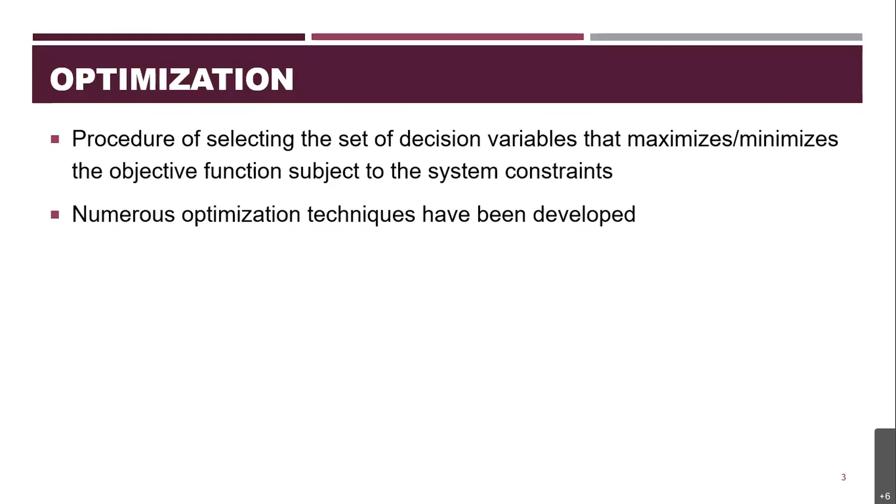Okay, so first let us start with the conventional linear programming technique. I am mentioning all these techniques - linear programming, non-linear programming, goal programming, dynamic programming - as conventional techniques, because these are all very age-old techniques, and there is a major difference between these conventional techniques and the recently evolved evolutionary algorithms.

The major difference between these techniques is that conventional techniques will arrive at the optimal solution based on some iterative procedure. So from one step to the next step, we have to find out the derivatives - it will use the derivatives to find out the optimal solution.

That derivative is nothing but basically finding out the slope, the gradient. So that will take us to the optimal solution. It's a kind of iterative process.

Whereas if you take the evolutionary algorithms or the swarm intelligence techniques, most of those techniques are population-based search techniques. So we have a group of population, and among that group of population, it will search for the best optimal solution. So that is another major difference between the conventional techniques and the evolutionary algorithms.

So if you take this linear programming technique, it can be applied to problems that are linear in terms of objective functions and constraints. So if your objectives are very simple and straightforward, and if it is linear in nature, then we can simply apply the linear programming techniques. It is one of the very widely used optimization techniques, and we have been using it for a long time.

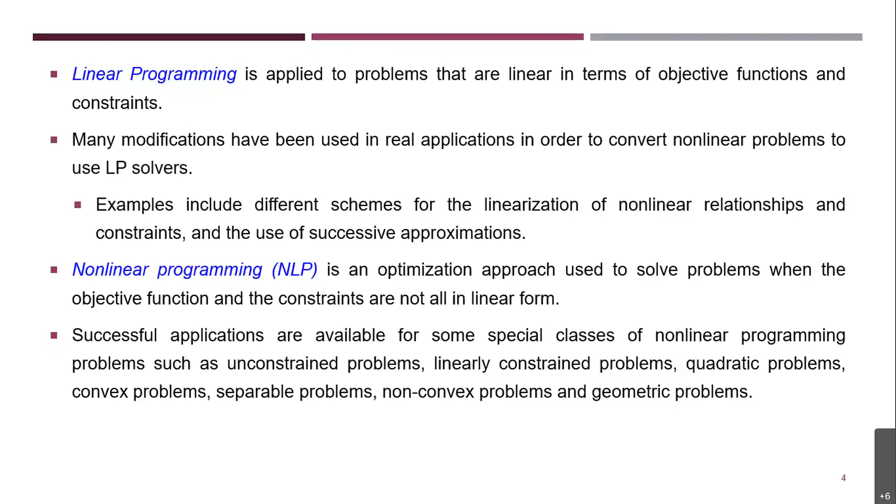So apart from linear and nonlinear programming, there is one more technique in conventional optimization methods, that is dynamic programming. This linear and nonlinear programming have limitations as well. To overcome that limitation, the other conventional technique which was developed is dynamic programming.

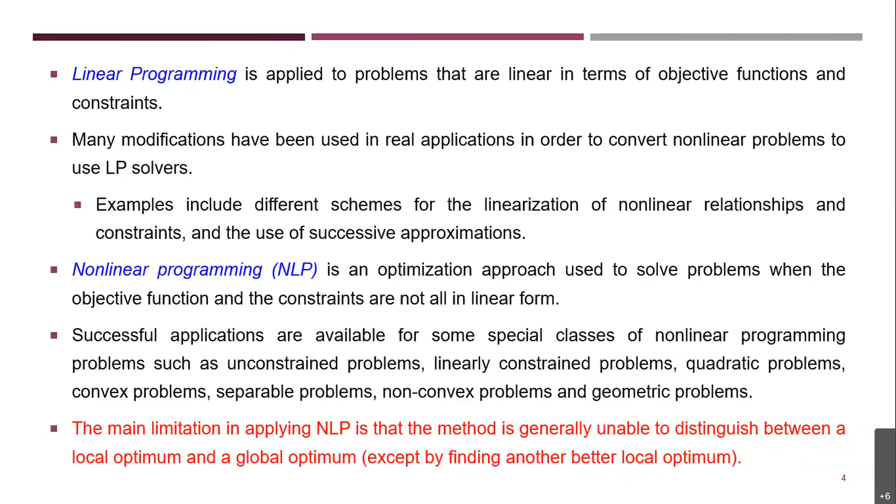The major limitation in nonlinear programming is that the method is generally unable to distinguish between a local optimal solution and a global optimal solution. This dynamic programming was developed by Bellman.

This dynamic programming offers advantages over other optimization tools since the shape of the objective function and the constraints do not affect it, and as such, it has been frequently used in many water resources systems management.

If you look at dynamic programming, we have to discretize the problems into several sets of stages and states. At every stage, a number of possible conditions of the system are identified. And the solution is identified at each individual stage, given that the optimal solution for the next stage is available.

So this dynamic programming will discretize the problem into stages, and again, for each stage, we can have different system states. So it will start a stage by stage process, and finally it will arrive at the optimal solution.

In the recent past, most researchers have been looking at approaches that combine efficiency and an ability to find the global optimal solutions. And one group of techniques known as the evolutionary algorithms seems to have shown the promise of achieving both.

So as I mentioned earlier, even though we have numerous conventional optimization techniques for solving optimization problems, still many people are interested in looking forward to a new technique, and there involves the evolutionary algorithms.

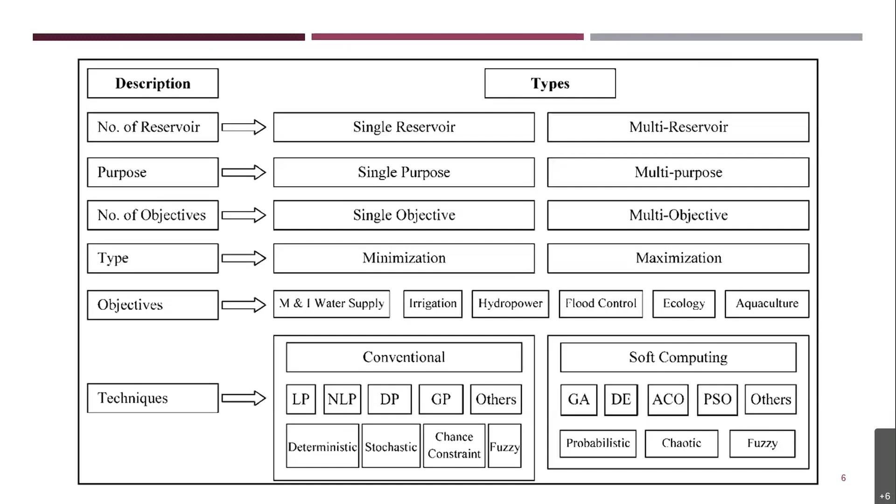So let's see how to formulate the optimization models. I specifically wrote this sentence: model formulation is the most difficult part.

The reason I wrote this sentence is that ultimately we have to express everything in terms of mathematical equations. Those mathematical equations should replicate the real life process. If it is not replicating that real life process, then our mathematical model is not the same as the real life model. We have to actually replicate what is happening in the field.

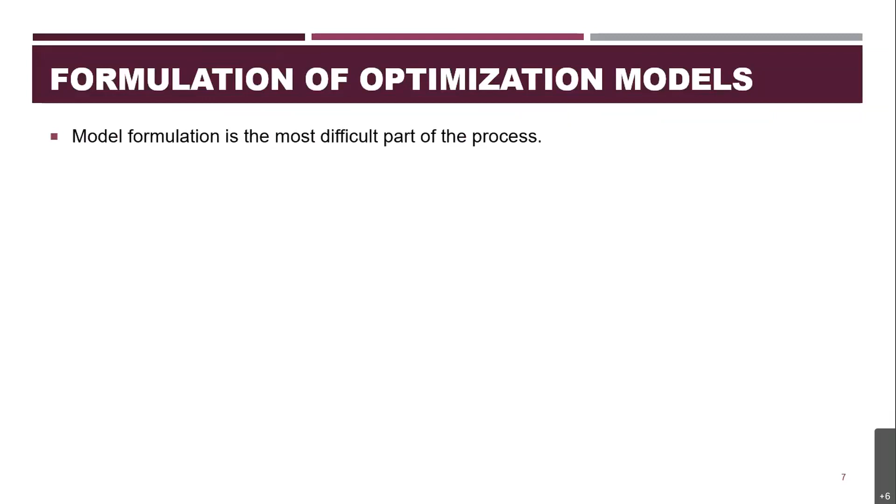So bringing all those concepts and constraints into the form of equations is a really challenging task. We have to be extra careful in developing our mathematical model, that is, in formulating the optimization model.

So how do we formulate that optimization model? Is there any criteria or guidelines? Wagner, in 1975, offered some guidelines for the formulation of mathematical optimization models. These are the guidelines proposed by Wagner in 1975.

The first point is: what are the key decisions to be made, and what problem is being solved. We have to first understand our problem, and what our main decision is here - what we are trying to achieve by solving this problem - that we have to understand first.

And what makes the real decision environment so complex as to require the use of an optimization model? What elements of complexity are incorporated in the model, and what elements are ignored?

Let's take the dam problem, the reservoir problem. If it is an irrigation reservoir, it has a lot of constraints. First we have to determine what the irrigation demand is, how much water we have to supply for the demand. We also have to look at the canal carrying capacity - if the canal carrying capacity is less than the demand, then obviously we cannot supply all the demand.

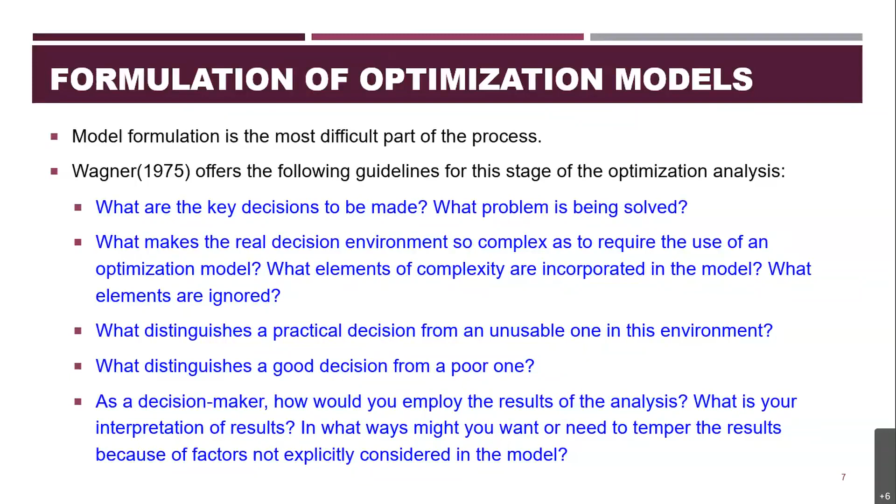And then, the algebraic representation of the optimization model, or the mathematical representation of the optimization model.

In most problems, the aim of the optimization model is to either maximize or minimize some objective function, subject to some constraints. So our model's objective function will be either maximize or minimize some objective function. If our model doesn't have any constraint, then it will be a simple optimization model.

But in reality, even a simple problem will have plenty of constraints. One example is designing a car parking lot. There we have to first look at the dimensions of the plot available, then look at the entrance and exit, the orientation, and the dimensions of the car, and accordingly prepare the parking lots.

Only if you consider all those constraints and bring them into your model will it replicate real results, whatever we obtain from the optimization model can be easily implemented in the field. Otherwise, if we are not considering all those constraints, whatever results we obtain from the optimization model cannot be implemented. Even if implemented, the result will not work.

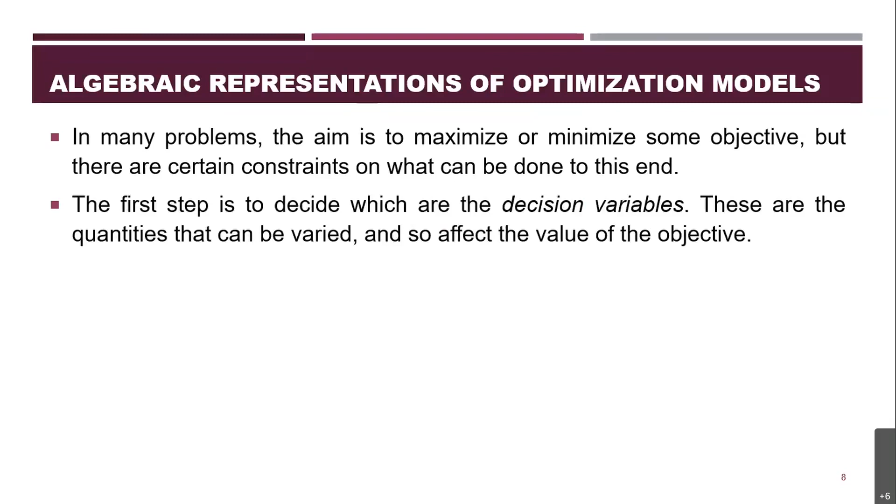So the first step is to decide which are the decision variables. These are the quantities that can be varied and so affect the value of the objective function. The second step in the formulation is to express the objective function in terms of decision variables. We must write down the constraints that restrict the choice of decision variables, and one common sense constraint is that many variables cannot realistically be negative.

This is one of the most important points in optimization models. Even if we develop any mathematical model, finally we will write one constraint known as non-negativity—that is, none of the decision parameters or decision variables are negative; they are always greater than 0.

So first we have to understand the problem, and based on that we develop the objective function. We determine the decision variables, and based on that we develop the objective function, whether maximization or minimization. Then we bring in all the constraints in the form of mathematical functions, and then we put the non-negativity constraint. This framework is a complete representation of any mathematical problem.

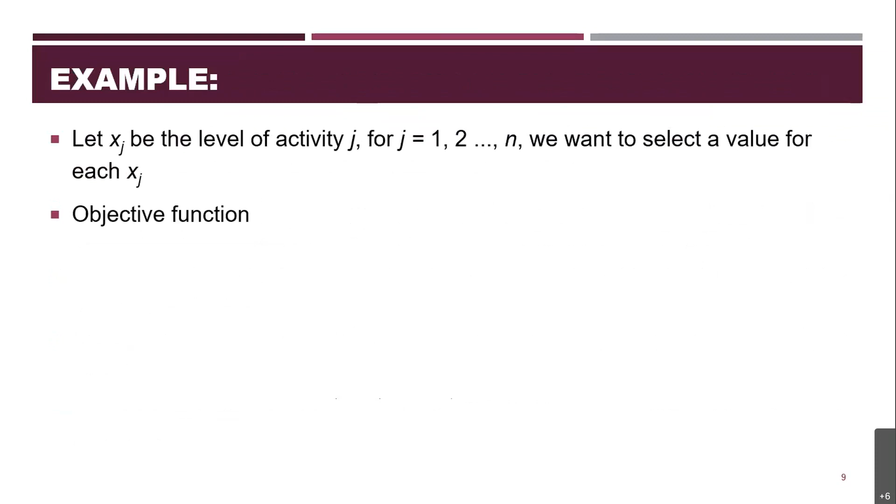Here is a simple example. Let x of j be the level of activity j for j equal to 1 to n. We want to select a value for x of j, so our objective function is c1 into x1 plus c2 into x2 plus dot dot dot cn into xn. Here x1, x2, xn are the decision variables, and c1, c2, cn are the cost functions.

So either we are maximizing or minimizing this objective function, which represents the type of the objective function. Then it is subjected to certain constraints: a1 x1 plus a2 x2 plus dot dot dot an xn less than or equal to a. This type of constraint, the first and the last, is an inequality constraint. The middle one is the equality constraint.

This is a classical optimization problem where you have a specific objective function subjected to various constraints. Once you formulate this objective function, we have to solve it by choosing an appropriate technique. Even before choosing that technique, there are some steps available, which we shall discuss now.

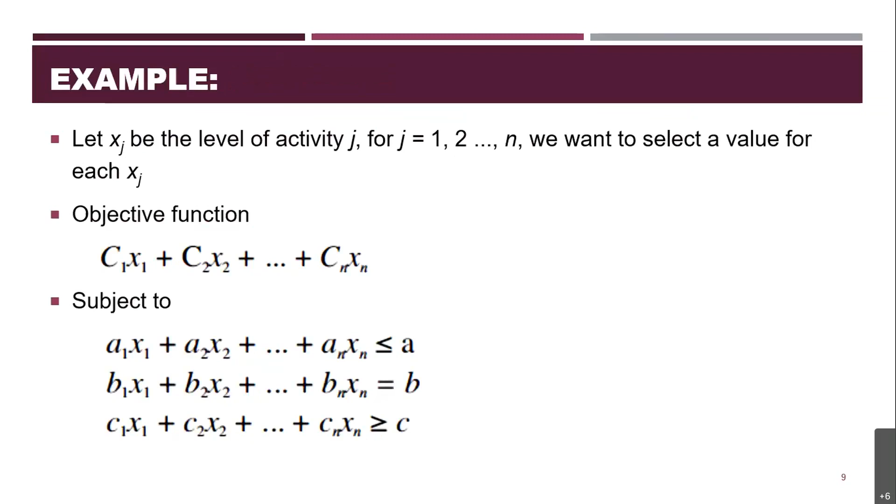So for any optimization model, what are all the possible answers? Sometimes there will not be any feasible solution—no feasible solution. For any problem, especially the optimization problem, we have a solution space. If the solution is not within that solution space after implementing the constraints, then it is an infeasible problem. There may be no values for x of j, our decision variable—we cannot find any appropriate optimal value for the decision variable. In that case, our constraints are not satisfied.

Such problems are called infeasible problems or infeasible solutions. And the second one,

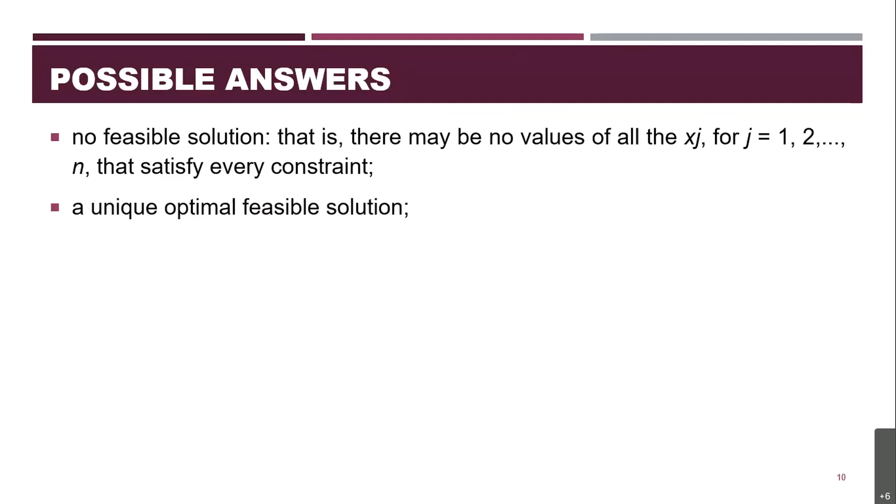sometimes it may have a unique optimal feasible solution. If you have only one single optimal solution, that single optimal solution is also called the global optimal solution. And then we will have a solution space.

In that, whatever solution is there, such solutions will satisfy all the constraints. When your solution satisfies all the constraints, then such a solution is called the feasible solution, because it satisfies all the constraints. But the thing is, it may not be a global optimal solution.

Sometimes it may be a local optimal solution. Locally within that small space, it may be the best solution. It will satisfy all the constraints. But if you look at the entire solution space, it may not be a global optimal solution. So in that case, we will have multiple local optimal solutions, that is, more than one optimal feasible solution.

And then a feasible solution such that the objective function is unbounded. So there is no boundary at one end. It will be infinite. That is, the value of the function can be made as large as desired in a maximization problem, or as small in a minimization problem, by selecting an appropriate feasible solution. So for any optimization problem, we may encounter any one of these answers.

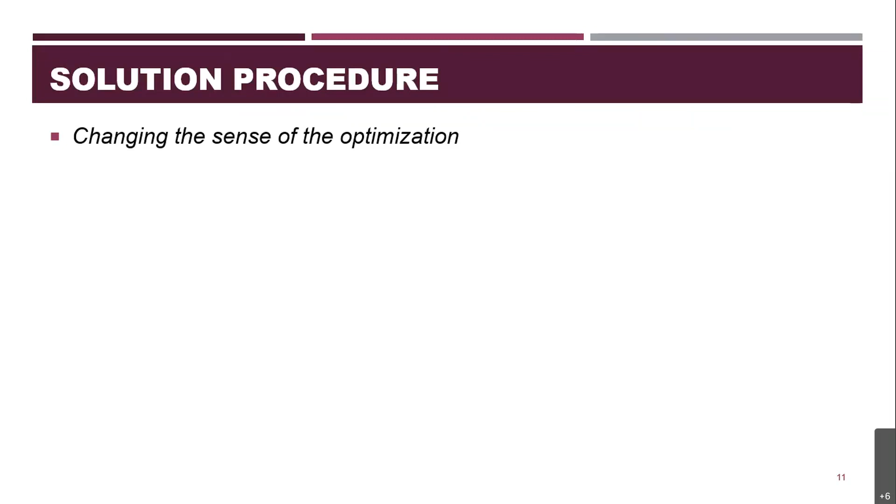First, changing the sense of optimization. That is, sometimes we may need to convert a maximization problem into a minimization problem, or a minimization problem into a maximization problem. This we usually do by multiplying the objective function by -1. By doing so, we are actually changing the nature of the optimization problem, converting a maximization problem into a minimization problem, or vice versa.

And the second one is changing the sense of inequality. We have seen one of the constraints as the inequality constraint, that is, it is not equal - it's either less than or equal to type, or greater than or equal to type. So those inequality constraints can be converted into equality constraints. For that, we have to either add slack or surplus variables. By adding slack or surplus variables, we can convert the nature of the constraints from inequality to equality constraints.

And then in the same way, we can also convert the equality constraints to inequality constraints, by multiplying with some ratios, and finally adding all those ratios to equal 1. Like that, we can convert the equality constraint into an inequality constraint.

So by following these procedures, we can change the type of the problem. For example, if your problem was earlier a maximization type, we can convert that into a minimization type. This process is nothing but a simplification process. Sometimes we cannot solve the problem as such, so in that case we have to modify the problem in a simpler way so that we can easily solve it. For that, we have to adopt all these procedures. Once we do all these things, our problem becomes simpler, then we can choose an appropriate technique and solve our problem.

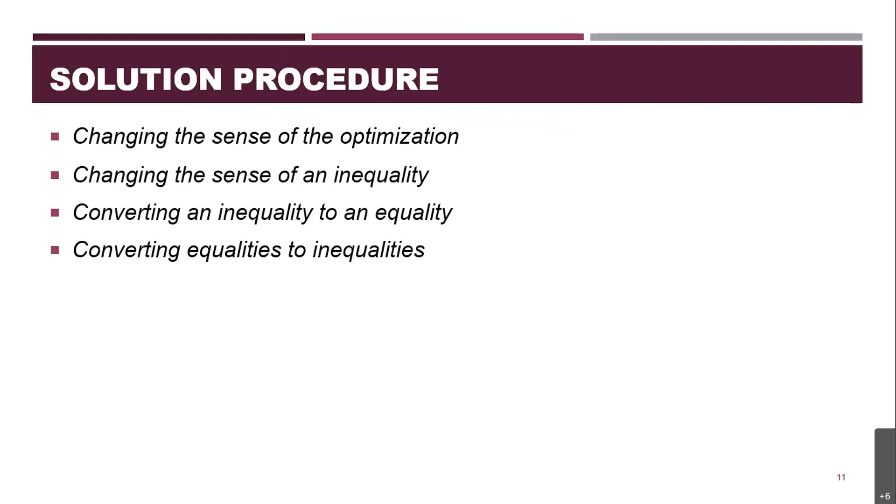So these are the basics in developing an optimization model. First, we have to look at our problem, what our exact problem is, and then develop the optimization model, which has a specific objective function. For developing that objective function, first we have to decide the decision variables - what we are trying to optimize. And then we have to bring in all the constraints. Once we have that optimization problem, we have to look at whether it requires any change or conversion. Once that is done, we have to choose the optimization technique.

As we have discussed earlier, there are many optimization techniques, starting from simple linear programming to recently developed evolutionary algorithms. In this lecture, I will be briefly discussing nonlinear programming. In fact, there are plenty of methods in nonlinear programming - for simple unimodal problems, there are separate techniques for unconstrained problems, and separate techniques for constrained problems. Here in this lecture, I will be restricting myself to only a few techniques.

So, nonlinear programming for one-dimensional minimization methods, or one-dimensional unimodal mathematical problems - for that we have two methods. One is the elimination method. Under the elimination method, we have unrestricted search, exhaustive search, dichotomous search, interval halving method, Fibonacci method, golden section method, and then the second method is the interpolation method.

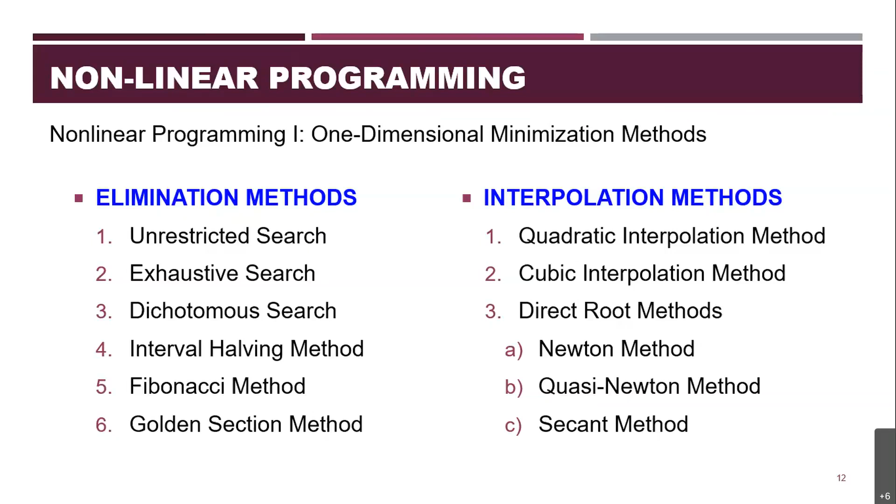There we have quadratic interpolation method, cubic interpolation method, direct root method, and under direct root method we have Newton method, quasi-Newton method, and finally secant method.

And the nonlinear programming for constrained and unconstrained problems. For unconstrained optimization techniques, we have direct search methods and indirect search methods. Under direct search methods, we have random search method, grid search method, univariate method, pattern direction method, simplex method, and in indirect method, steepest descent method, conjugate gradient method, Newton's method.

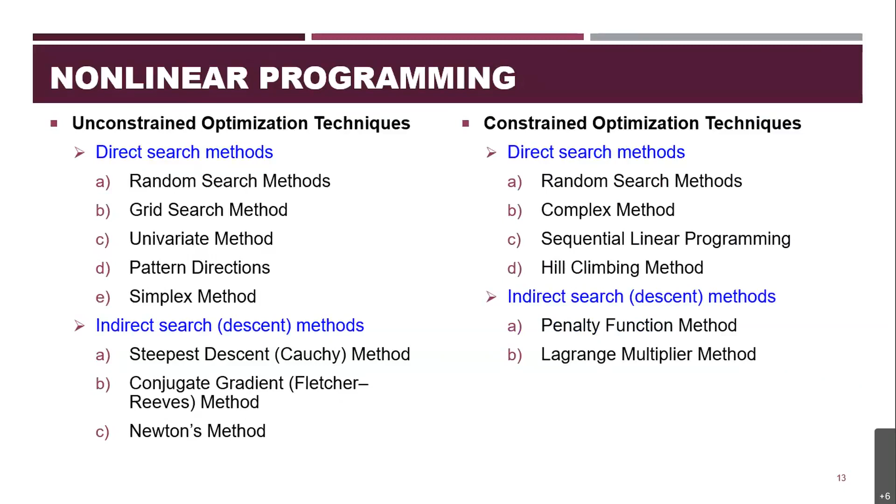Nonlinear programming for constrained optimization includes again direct methods and indirect methods. In direct method, we have random search methods, complex method, sequential linear programming method, hill climbing method, and in indirect method, we have penalty function method and the Lagrange multiplier method. So here let us see how to solve a nonlinear optimization model and its solution procedure.

Since we are discussing the nonlinear technique, as I told, this nonlinear technique will arrive at the optimal solution based on some iterative procedure. That is, from one step to the next step, it progresses through iterations. It may find the derivatives, the gradient, or the slope. So by doing that iteration, we are trying to arrive at the optimal solution.

Whereas these evolutionary algorithms usually search for the optimal solution from a solution space, that is, from a population of solutions. Since these conventional methods are based on an iterative procedure, we have to basically find out the derivatives in each and every step.

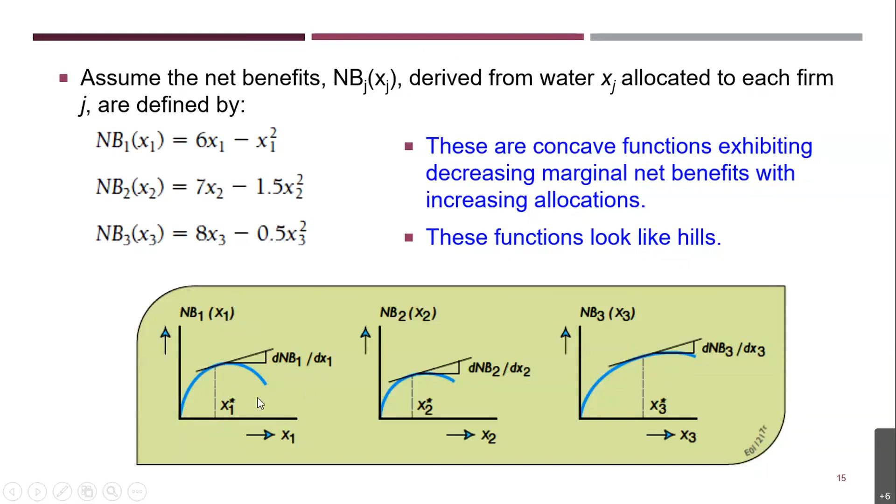If you take the first firm, take the derivative with respect to x1, that is 6 minus 2x1. If you equate that to 0, you can find x1 equals 3. So when x1 is equal to 3, we can obtain maximum benefit from firm 1. That's the solution based on the calculus approach. The derivative dNB(x1)/dx1 of the net benefit function for firm 1 is 6 minus 2x1, and hence the best allocation to firm 1 would be 3.

Similarly, we can obtain the best optimal solutions for firm 2 and firm 3, and those two answers are 2.33 and 8 respectively. So the total amount of water desired by all firms is the sum of each individual firm's allocation, and that works out to be 13.33 — that is 3 plus 2.33 plus 8.

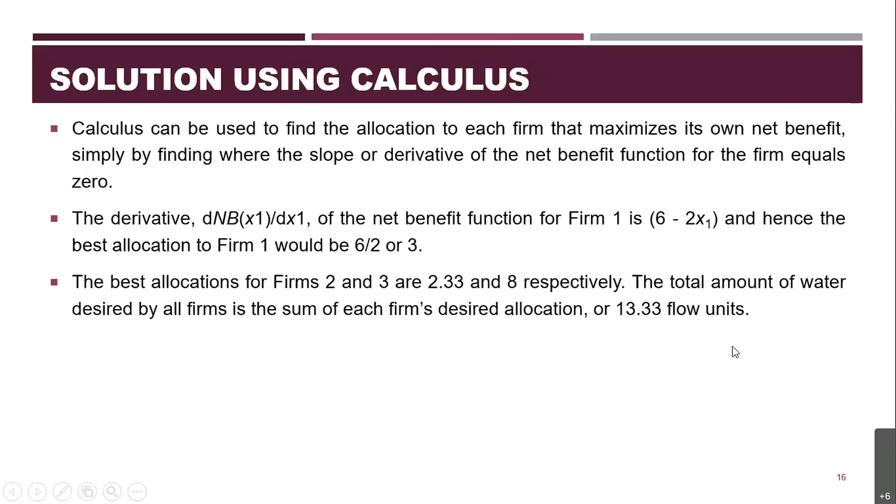So here we have not considered the total quantity of discharge. In our previous problem, it was mentioned that the total amount of water available is limited to a quantity Q. So far we have not considered the quantity Q, that is, we have not taken that constraint into our problem.

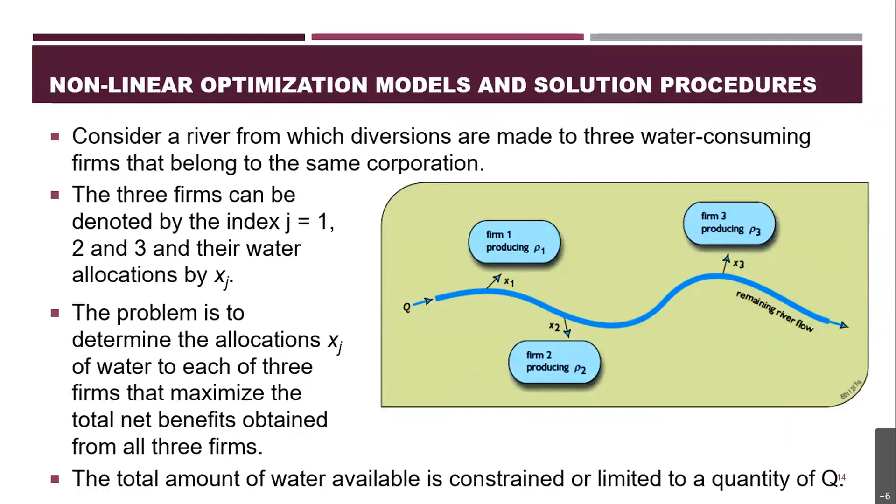If there are no constraints associated, follow the calculus approach for the solution. But if you put the constraint that Q is only 6, the total quantity of water available is only 6 units, then we cannot allocate the earlier quantities to these individual firms, because that would require a total of 13.33 flow units. Here we have a lesser quantity of water available, so we have to go for a different approach. However, only 6 units of flow are available for all 3 firms, so this constraint renders the previous solution infeasible.

So in this case, we want to find the allocations that maximize the total net benefit obtained from all firms, subject to having only 6 flow units to allocate. In this case, the simple calculus method will not be a suitable technique, so we have to look for a different technique.

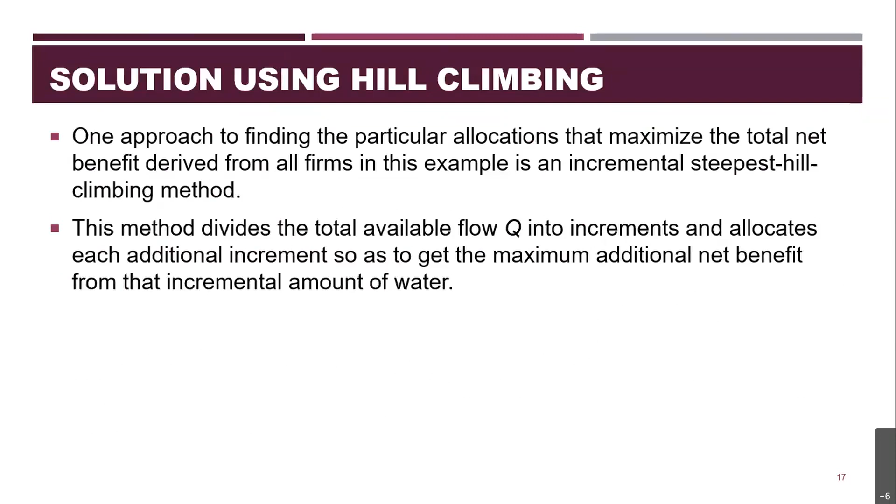Let us work out this using a method known as the hill climbing method. One approach to find the particular allocation that maximizes the total net benefit derived from all the firms in this example is an incremental steepest hill climbing method. This method divides the total available flow Q into increments and allocates each additional increment so as to get the maximum additional net benefit from that incremental amount of water. This procedure works in this example because the functions are concave, that is, the marginal net benefit decreases with increase in allocation.

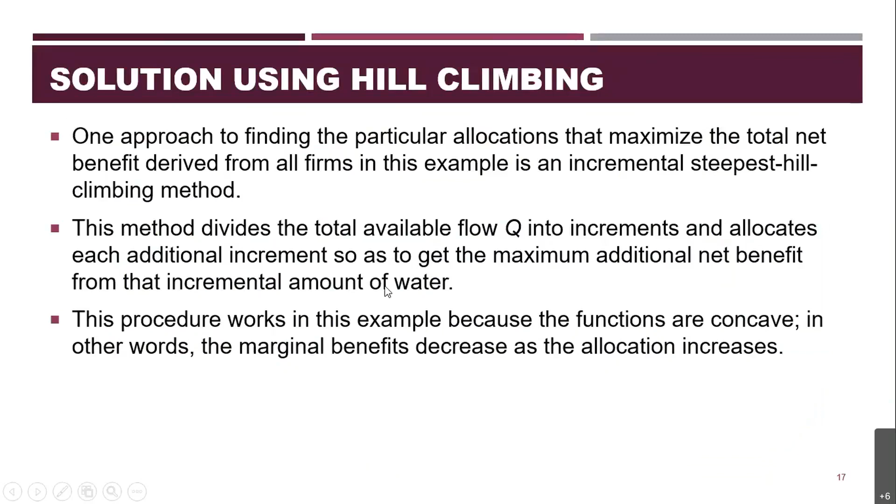Okay, let's look at an example of the same problem. We have a river flow, and from that river we have to allocate water to three different firms. These are the objective functions for the three firms: 6x1 minus x1 square, for the second firm 7x2 minus 1.5 x2 square, and for the third firm 8x3 minus 0.5 x3 square.

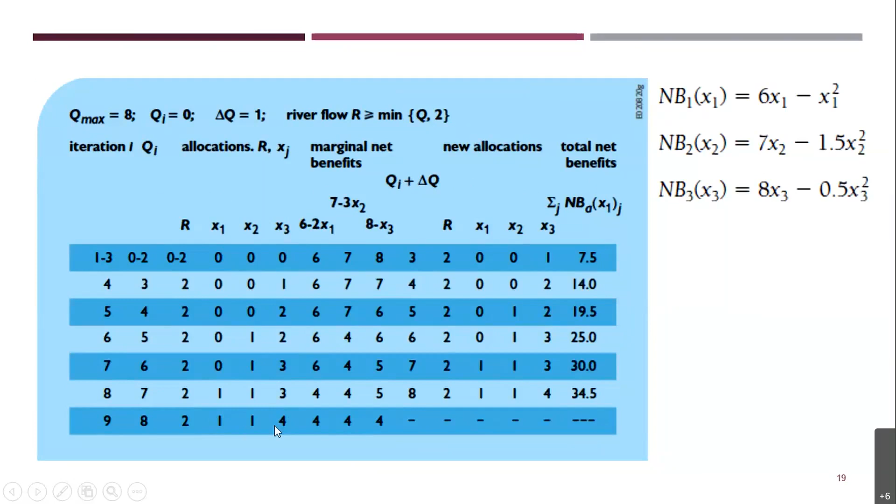The allocation for x1 is 1 unit, x2 is 1 unit, and x3 is 4 units. Whereas when the delta Q is very fine, then the entire allocation changes. X1 is 3 units, x2 is 2.33 units, and x3 is 8 units.

And the total net benefit here works out to be 49.2 units, whereas in the previous problem it's almost 34.5 only. So with the increase, with the size of the increment, or sometimes it's based on the discretization...

If that is fine, if it is very finer, then we will get more finer optimal solutions. But however, that may increase the computational time, or sometimes it may also result in some other issues like curse of dimensionality in terms of dynamic programming.

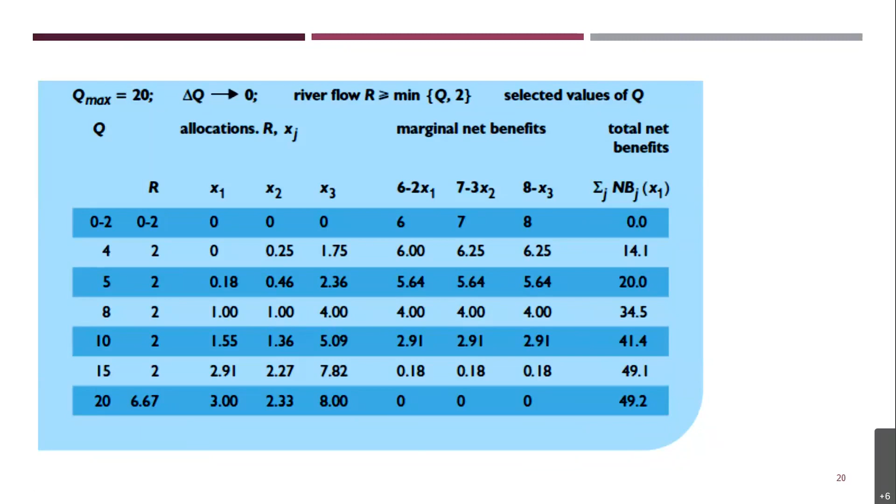So it's a final allocation for each firm with respect to the Q.

So this hill climbing approach leads to optimal allocations only if all the net benefits, when summed, are being maximized or concave. Only when the objective function is of concave type can we use that hill climbing approach. That is, the marginal benefit decreases with the increase in allocation, which is a concave type problem. Otherwise, only a local optimal solution can be guaranteed. That's another limitation of this hill climbing method.

That's the same for even calculus-based optimization algorithms.

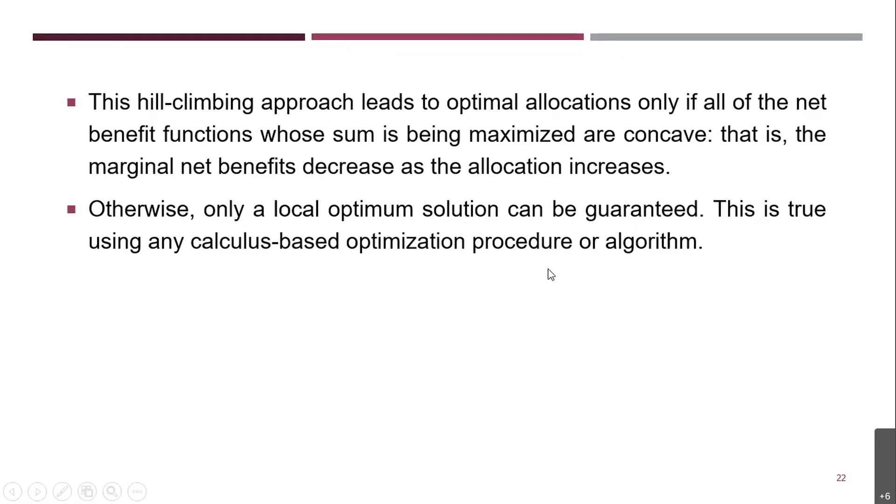So another method which is widely used for non-linear type optimization problems is the branch and bound method. Actually, this branch and bound method is mostly used for mixed integer linear programming problems. Because of its simplicity, it is also used for solving most non-linear optimization models. This branch and bound method is very effective in solving mixed integer linear and non-linear programming problems.

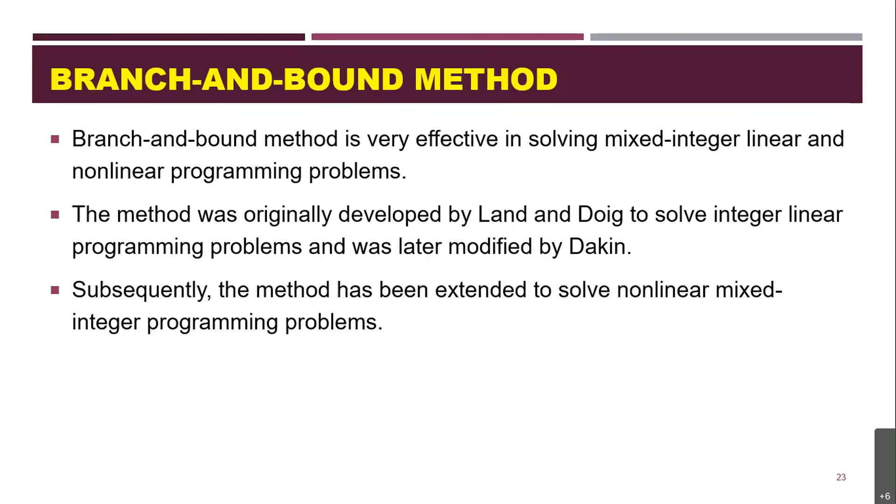The method was originally developed by Land and Doig to solve integer linear programming problems and was later modified by Dakin. Subsequently, the method has been extended to solve nonlinear mixed integer programming problems. So let us consider the following formulation.

Let our objective function be minimization type, that is minimize f of x, which is a nonlinear function, subject to g of j of x greater than or equal to 0, where j equals 1 up to m, and h of k of x equal to 0. This is the equality type constraint, the first one is the inequality type constraint, and the third is x of j is an integer.

The branch and bound method was mostly first implemented for solving mixed integer linear programming, where the decision variables being integers is one of the constraints. Here x is a decision vector that contains the decision variables.

If you consider only the first two constraints, the equality and inequality constraints, then the design vector x is called a continuous feasible solution if it satisfies those two. If the design vector x satisfies all three constraints, including x being an integer, then it is called an integer feasible solution.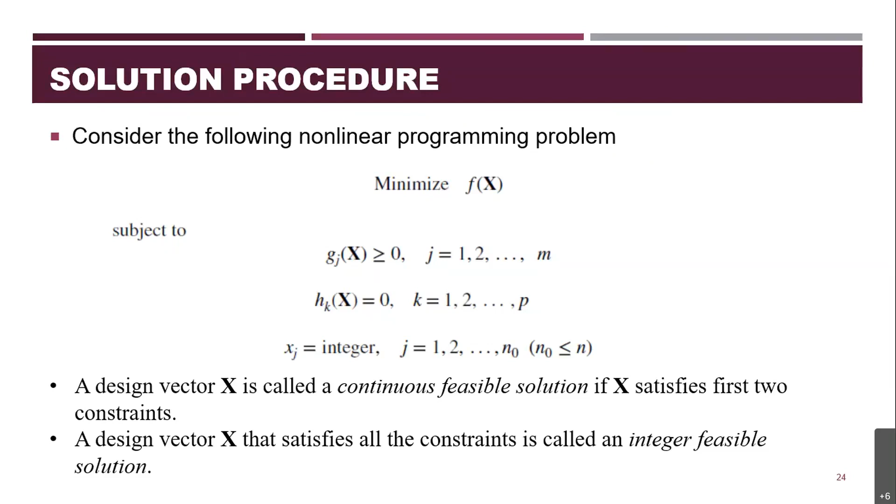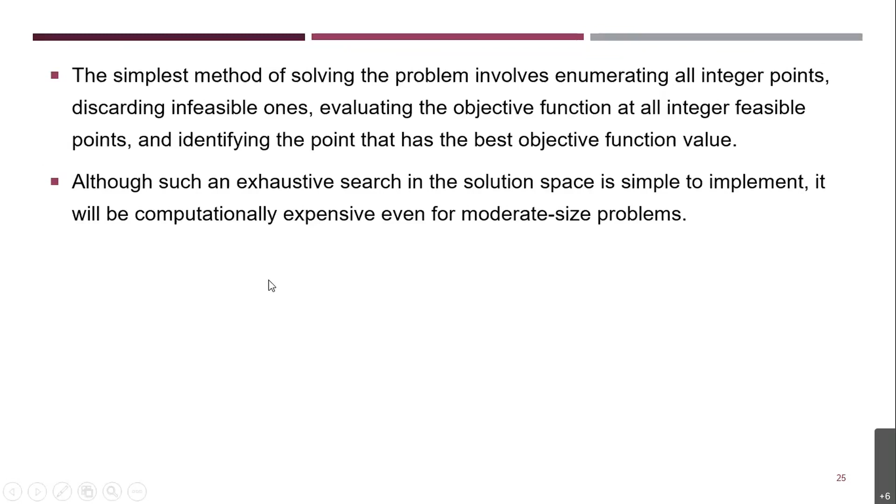The simplest method of solving the problem involves enumerating all the integer points, discarding the infeasible ones, evaluating the objective function at all integer feasible points, and identifying the points with the best objective function value. Although such an exhaustive search is simple to implement, it becomes computationally expensive even for moderate size problems. The branch and bound method can be considered a refined enumeration method in which most non-promising integer points are discarded without testing them.

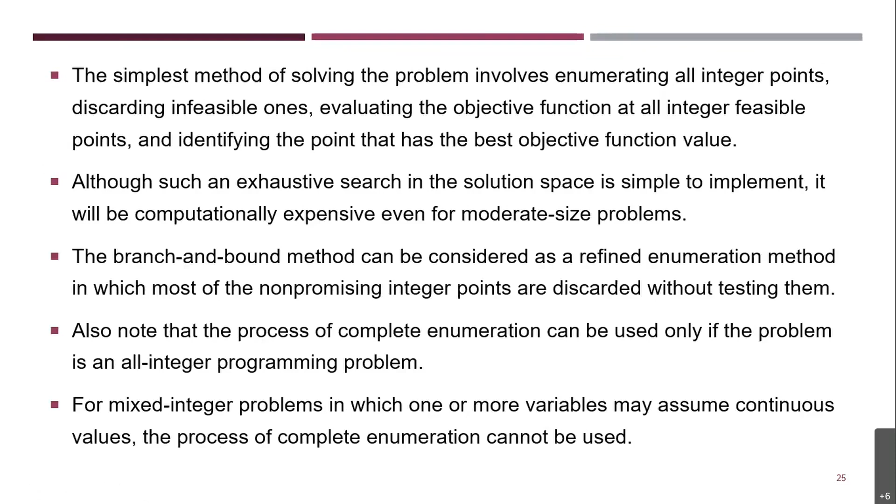Also, the process of complete enumeration can be used only if the problem is an all-integer programming problem. For mixed integer problems in which one or more variables may assume continuous values, complete enumeration cannot be used. So mostly the complete enumeration method is used only when all the variables are integers.

In the branch and bound method, the integer problem is not directly solved. The method first solves a continuous problem obtained by relaxing the integer restriction on the variables. This is the first step: without considering the constraint that all decision variables are integers, the problem is solved using any linear programming technique.

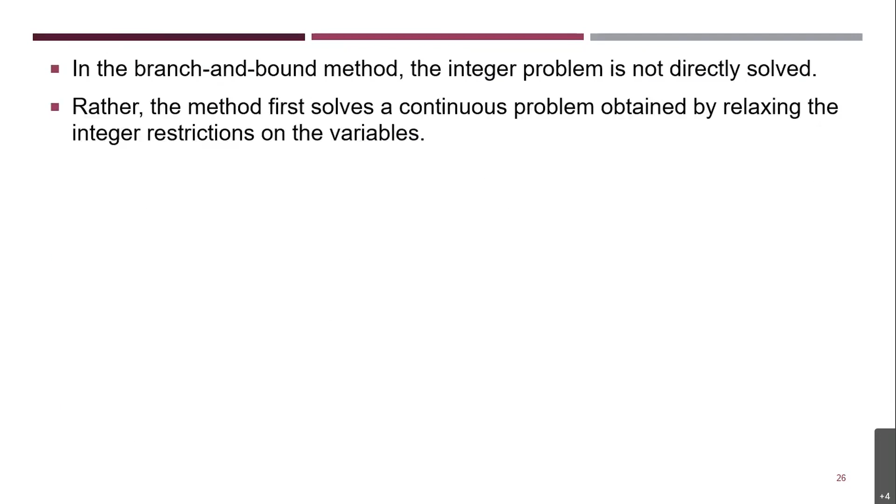If the solution of the continuous problem happens to be an integer solution, it represents the optimum solution of the integer problem. Otherwise, at least one of the integer variables, say x of I, must assume a non-integral value. If x of I is not an integer, we can always find an integer x of I such that it lies between these limits.

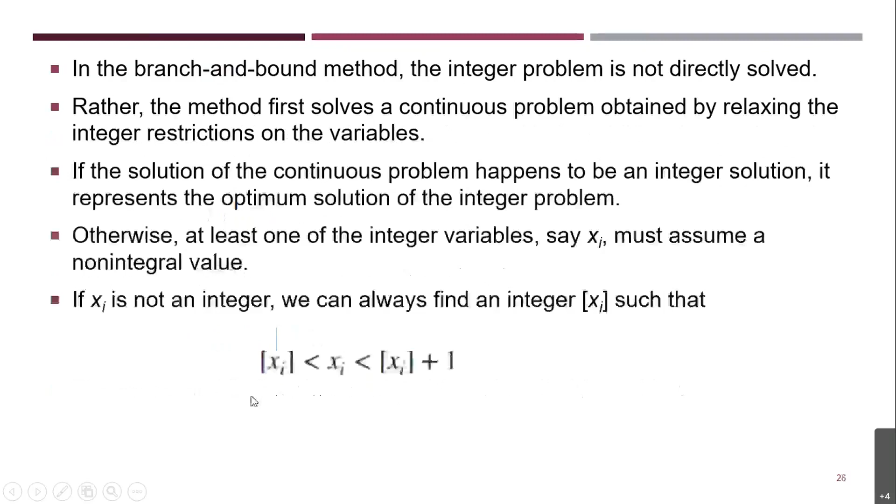Once we formulate this condition, we can categorize this into two subproblems: one with the additional upper bound constraint, and the other with the lower bound constraint. The process of finding these subproblems is called branching. Basically, in the branch and bound problem, we divide the problem into two types, and this process of separating the problems is called branching.

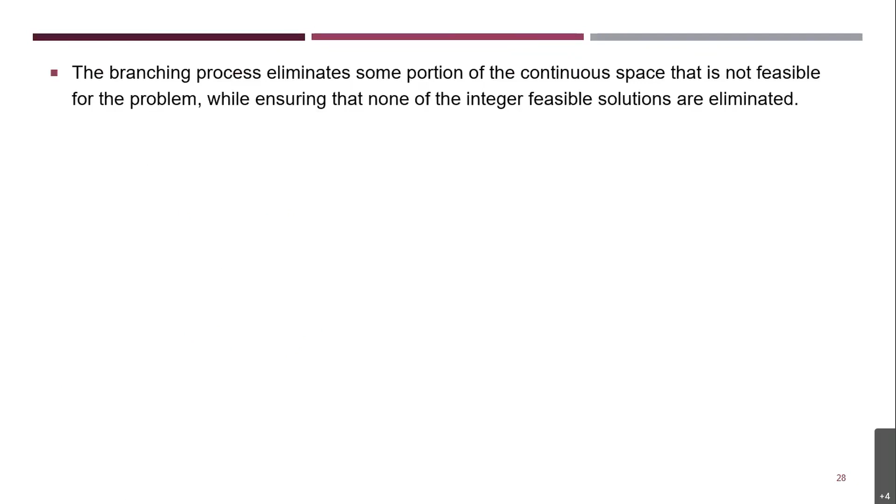The branching process eliminates some portions of the continuous space that are not feasible for the problem, while ensuring that none of the integer feasible solutions are eliminated. Each of these two subproblems is solved again as a continuous problem. The solution of a continuous problem forms a node, and from each node, two branches may originate.

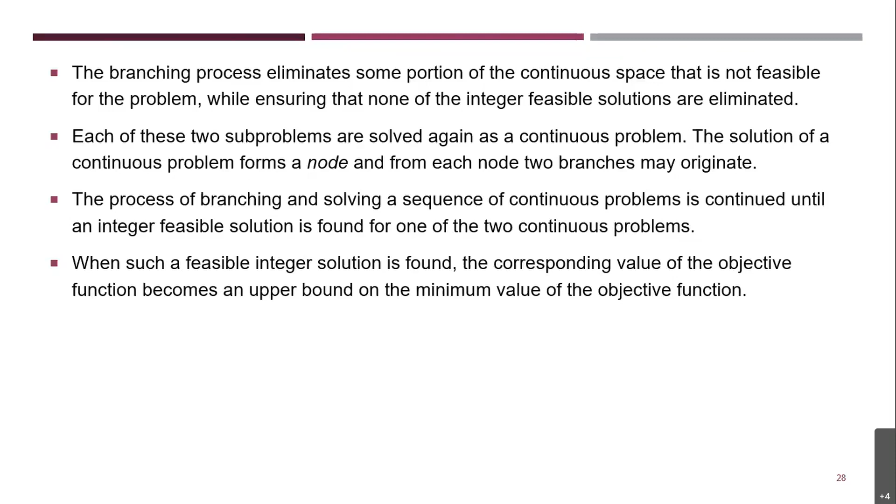The process of branching and solving a sequence of continuous problems continues until an integer feasible solution is found for one of the two continuous problems. When such a feasible integer solution is found, the corresponding value of the objective function becomes an upper bound on the minimum value of the objective function. At this stage, you can eliminate from further consideration all continuous solutions whose objective function values are larger than the upper bound. The value of the upper bound is updated whenever a better bound is obtained.

If the number of decision variables is quite less, easily we can solve any optimization problem manually. If it is only 2-dimensional, we can use the graphical approach or solve it manually. But most real life and real world problems have n number of objective functions and a number of constraints. In that case, if you formulate the canonical form of the optimization problem, the matrix becomes very big, and we cannot solve it manually.

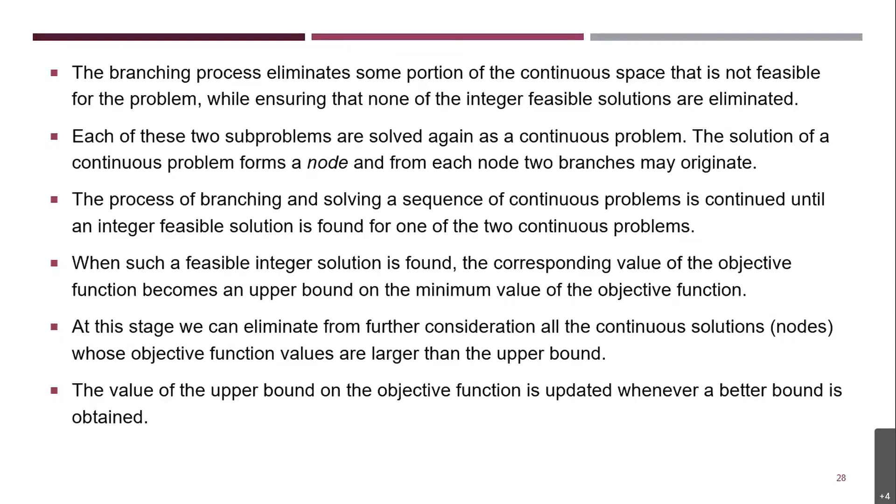So in that case, we look at various tools that may aid us in solving the optimization problem. Such tools are available for solving optimization problems, and I have used one such type of tool to solve a real world problem.

So that's what this case study is about. In this case study, I'm going to discuss the optimization of the Koyna hydroelectric project.

This hydropower production is a nonlinear problem. We solved it by first formulating the optimization problem mathematically, and then solving that mathematical formulation using a software called Lingo. It has various solvers available, and we used the global solver, which is capable of solving nonlinear problems.

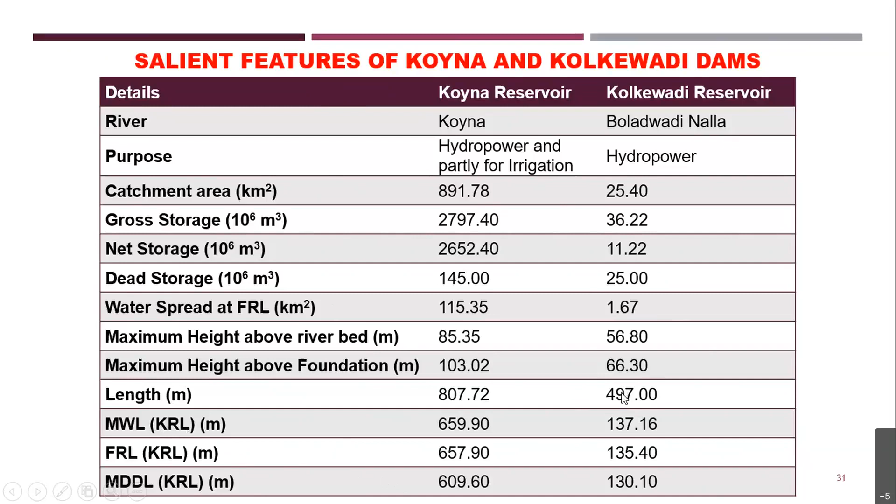So here maximum water level, full reservoir level, minimum drawdown level, and various other features are given. These are the details of the powerhouses.

Stage 1 and stage 2 are housed in a single unit or plant, so we have taken it as a single unit, PH1. It has 4 turbines in both stage 1 and stage 2, with a total capacity of 4 turbines of 70 megawatts in stage 1, and

4 turbines of 80 megawatts in stage 2. Stage 3, which comes under Kolkewadi Dam, we have named PH2, with 4 turbines of 80 megawatts. Stage 4 is the biggest power plant in the system, having 4 turbines of 250 megawatts.

And all these PH1, PH2, PH3 power plants are on the western side of the reservoir, whereas the Koyna Dam powerhouse is on the dam foot. Actually, the water flows to the eastern side from this way.

Since the major power plants are located on the western side of the reservoir, that has resulted in conflict in using the available water. If you want to generate more hydropower, a major share of the water needs to be diverted to the western side. In fact, that resulted in disputes among various states that share the Krishna water. According to the Krishna Water Dispute Tribunal, that has limited the diversion of water towards the western side for power production.

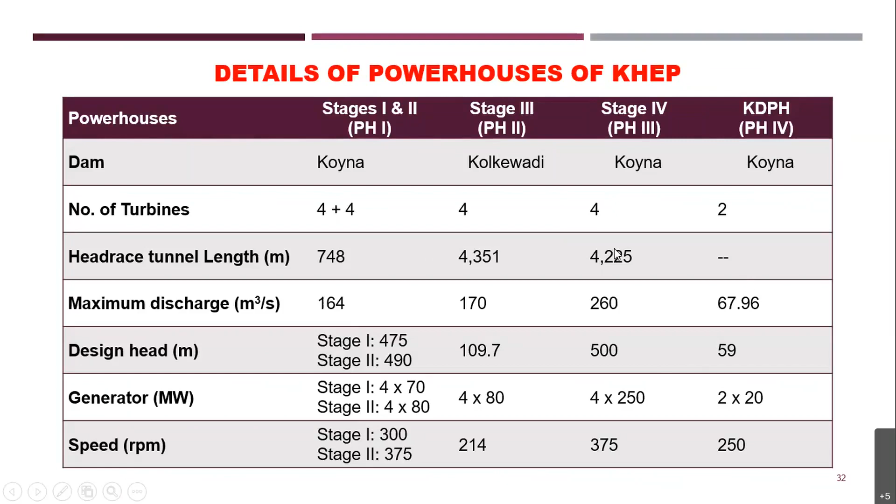The complexities are that hydropower releases are termed as non-consumptive, since the water is used for some other purpose after power generation, mostly for irrigation. However, in the case of Koyna hydroelectric projects, the releases to major powerhouses and irrigation are in opposite directions, which makes the operation of the system very complex.

Diverting a large volume of water to major powerhouses on the western side of the reservoir resulted in disputes among different stakeholders. The Krishna Water Dispute Tribunal limited the diversion of large quantities of water towards the western side for power production, and there also exist conflicts among all the powerhouses, since they are at different levels and have different capacities of power generation. So considering all these complexities that exist in the field, we have to develop a suitable optimization model for maximizing the hydropower production from the system.

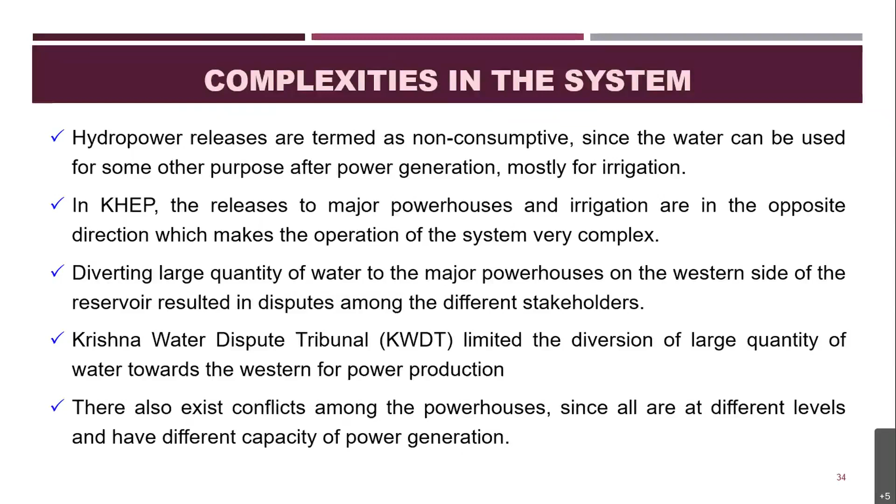So we developed a model. Before developing an optimization model, we studied the existing operation of the hydropower plant by developing a simulation model. Actually, this Koyna hydroelectric project is a peak power plant, that is, it is operated only for producing peak power demand.

In power production there are 2 categories: one is base load and the other is peak load. Mostly these hydropower plants are operated producing peak loads, because we can easily increase or decrease power production in hydropower generation compared to other modes of power generation.

So again, this Koyna system is also a peak load system, operated only for a few hours of duration in a day. So we tried to study the existing operation policies of the system using a simulation model, and we simulated the operations for different durations, that is for 4-hour, 6-hour, and 8-hour durations.

We also considered 2 scenarios based on the Krishna Water Dispute Tribunal constraints, that is a limitation on the water. According to the Krishna Water Dispute Tribunal, we cannot divert huge quantities of water for power production towards the western side, so we considered that constraint in two cases: one strictly following that condition, and the other without following that constraint.

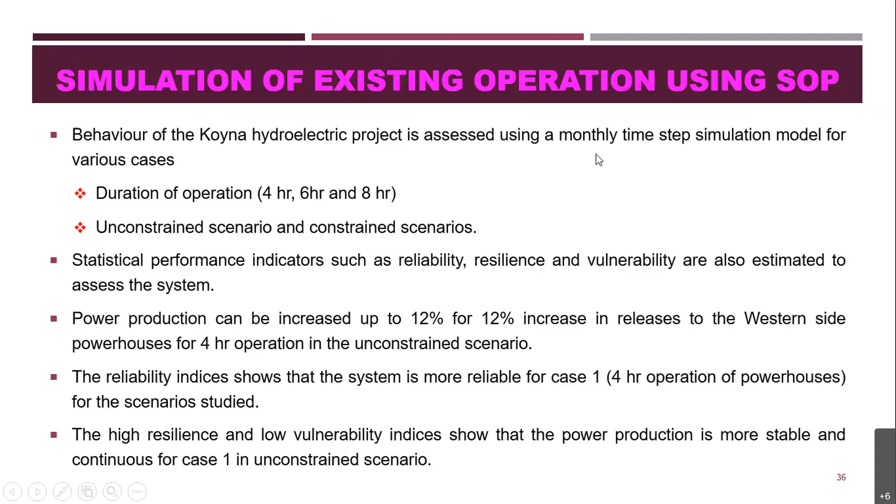So with this background, we developed the optimization model. The objective function of the optimization model is maximizing the hydropower production from all 4 powerhouses.

So that is given here: Maximize Z equal to summation of T equal to 1 to 12 and N equal to 1 to 4 of PH N comma T. PH is nothing but the power production, N represents the number of hydropower plants, grouped into 4 plants PH1, PH2, PH3, PH4, and T represents the time period. It's a monthly model, so T represents month, time period 1 to 12.

So PH of N, T is the power produced from the powerhouse N during the time period T in kilowatt hour. According to Loucks et al. 1981, power production during any time period T depends on the installed plant capacity, flow through the turbines, and the average effective storage head, number of hours of operation, and a constant for converting the product of flow, head, and plant efficiency to electrical energy.

Accordingly, the power production function is given as: PH equals K R H eta, where K is the constant used to convert the hydropower into kilowatt hour, R is the release to the powerhouse, H is the net head, and eta is the plant efficiency.

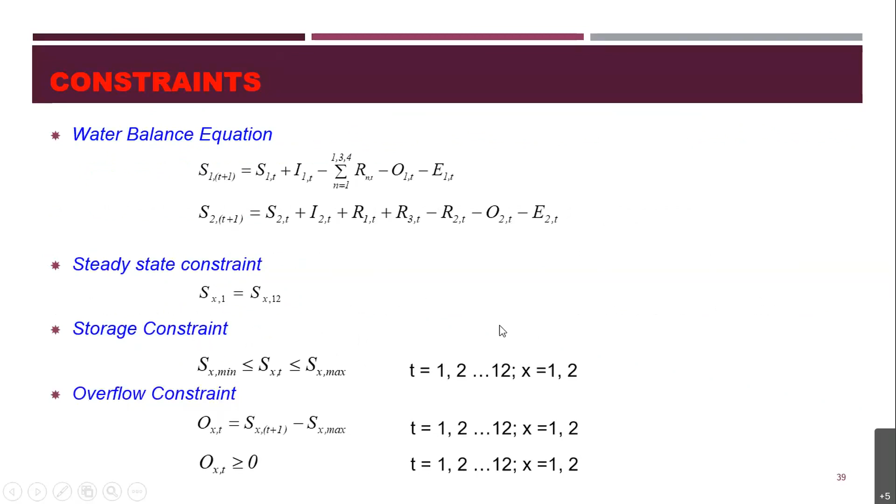Once the optimization model, this mathematical model, is formulated with the objective function and considering all the field constraints, we then have to solve the optimization model. In solving that model, we analyzed 4 policies, 4 scenarios.

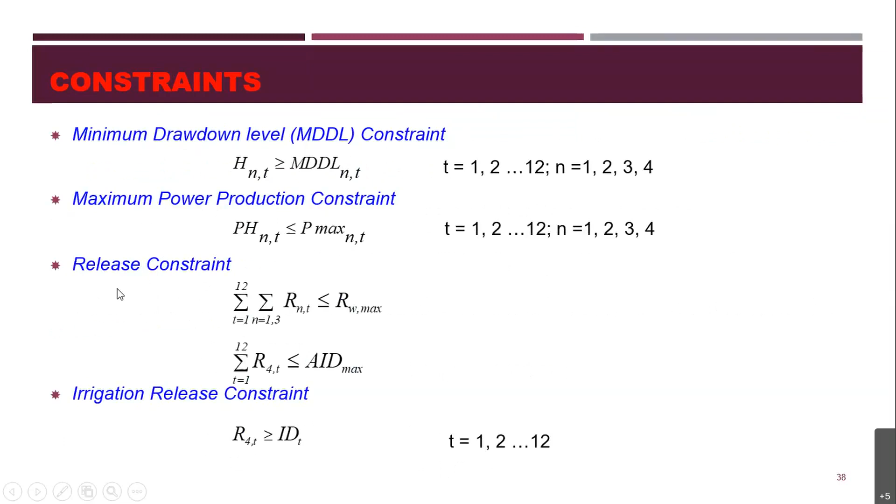The first scenario has no binding constraint on the western and eastern side releases. We have not considered any release constraint on the power plant. This is just to know the potential available for power production - what is the optimal hydropower production that can be obtained without any binding constraint on releases, both on the western side as well as on the eastern side.

The second policy considers only the annual binding constraint on irrigation, ensuring that at least the total annual irrigation demand is satisfied every year. That is the second policy.

When doing this, we found that though the annual irrigation demands are satisfied every year, if you look month-wise, the demands are not satisfied properly - in some months the releases were less than the demand, and in some months more than the demand. Hence, to ensure that both the annual as well as the monthly demands are satisfied for irrigation, we developed policy 3, where both the monthly and annual binding constraints on irrigation are considered.

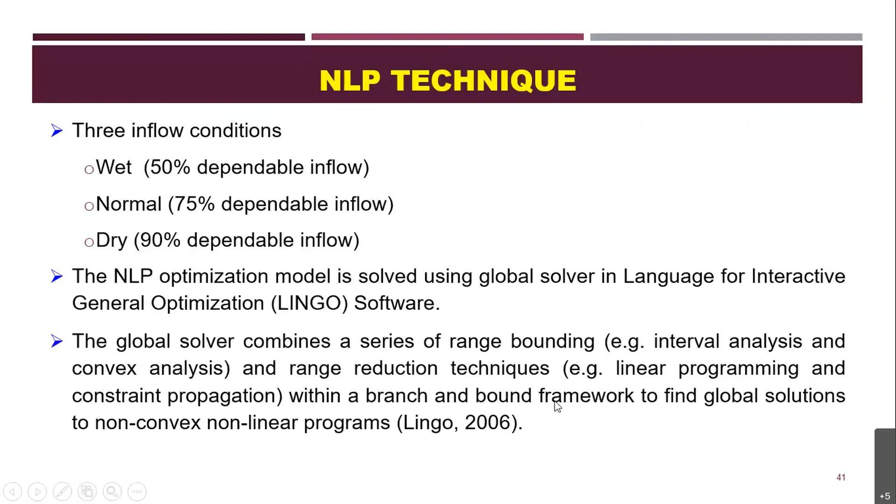So these are the results obtained from the model for maximum annual power production. There are 4 policies. Policy 1 has no constraints on releases for power production or irrigation. Policy 2 shows the constraint on annual irrigation releases, so that demands are satisfied annually as per requirement. Policy 3 has both annual and monthly irrigation constraints. Policy 4 is strictly based on the Krishna Water Dispute Tribunal.

When no binding constraints are considered, the model obviously results in higher hydropower generation. Also, when the Krishna Water Dispute Tribunal constraints on diverting water are strictly enforced, the wet and normal scenarios result in almost the same hydropower generation, and the difference among the 3 inflow scenarios is quite small, meaning inflow doesn't have much effect here. On the other hand, without that constraint, power production varies significantly with changes in inflow scenarios.

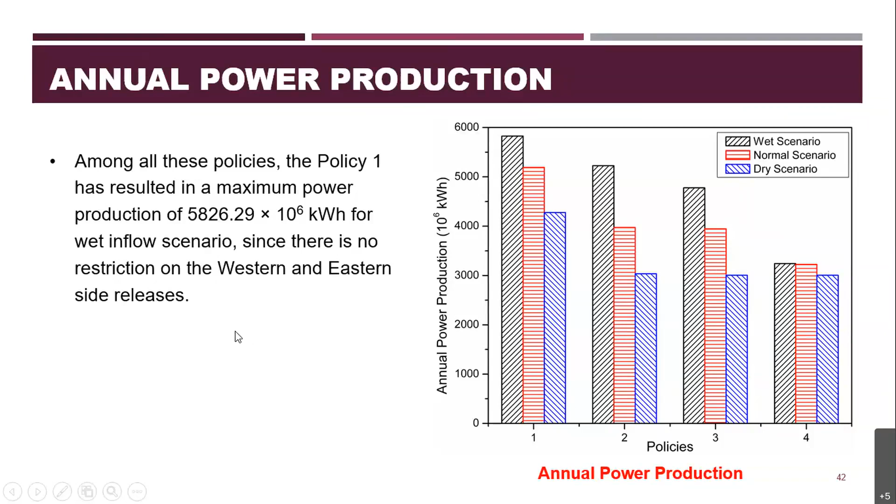Among these policies, policy 1 has resulted in a maximum power production of 5826.29 million kilowatt hours for the wet inflow scenario, since there is no restriction on the western and eastern side releases. These are the production values for each definition, for the wet inflow scenario.

That's the biggest power plant in this system. Powerhouse 4, through which irrigation releases are made, has very few releases in the model, and in fact no releases in most months, because it's a power plant with small power production capacity. Since it's a maximization problem, without enforcing such a constraint the model ensures only maximum production and has not given any significant irrigation.

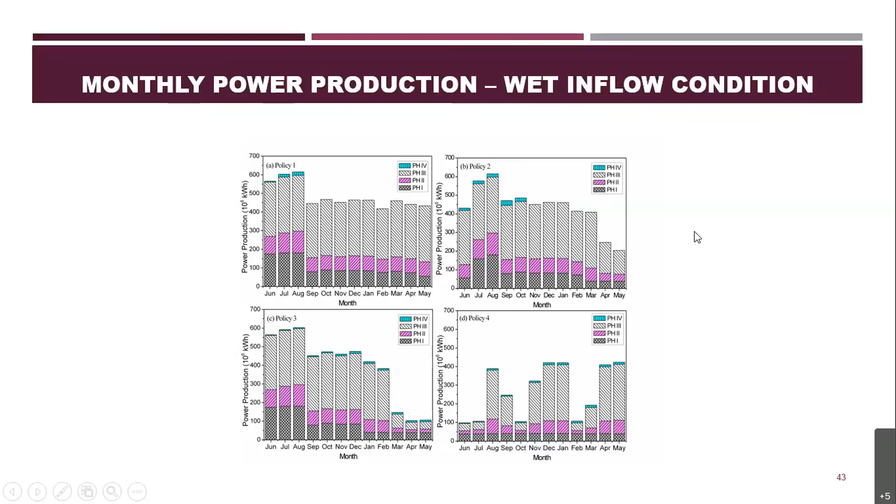Policy 4 strictly enforces the Krishna Water Dispute constraint, where we consider the binding constraints on releases towards both the western and eastern sides. All these figures are for the wet inflow condition; the same analysis applies for normal and dry inflow conditions, showing releases to different power plants in the system for different policies and inflow scenarios.

So we have the optimal solution here. After obtaining the optimal solution, we have to check whether that optimal solution is sustainable for a longer time period. To check that, we simulated that optimal solution, simulated the operations of this Koyna hydroelectric project, and then studied the performance of the system. Upon doing that, we identified that the system has satisfactorily performed well for a longer time period using the obtained optimization model.

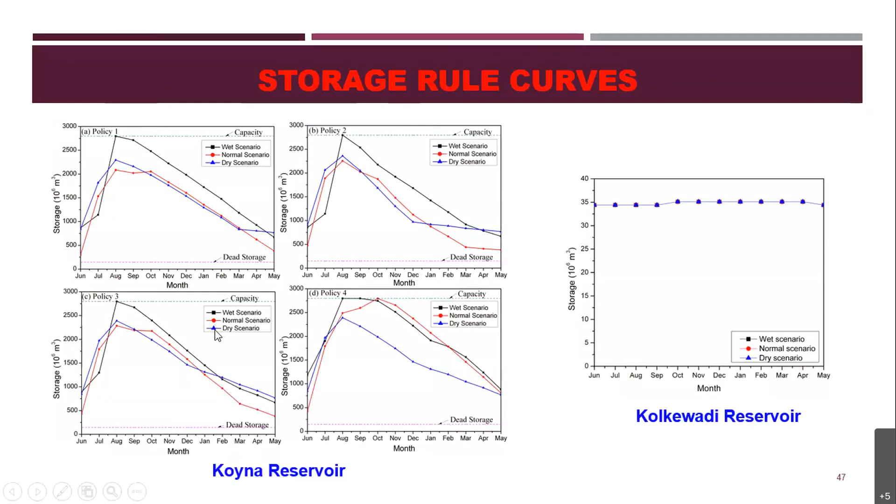Actually, we simulated policy 3. Policy 3 has satisfied both the irrigation demands, month-wise irrigation demands, and has also resulted in considerable hydropower production compared to policy 4. So we took policy 3 as the implementable one, and we simulated those optimal policies of policy 3 using the simulation model.

In that, we studied various indices like mean frequency, monthly frequency irrigation deficit, annual frequency irrigation deficit, annual average irrigation deficit, and percentage annual irrigation deficit. And again, we simulated this model, or these policies, for different inflow scenarios: wet inflow scenario, dry inflow scenario, and normal inflow scenario.

So you can see that almost all policies, particularly policy 3, performed quite well for these three different inflow scenarios. In fact, the failure is also quite less, only in a few months has it failed. And if you look at the percentage failure, that is even less than 10% of the requirement.

So when you compare with the storage of the Koyna dam, 74.97 is the maximum deficiency resulted, the annual average irrigation deficiency resulted by the simulation model. When we compare this deficiency with the storage of the Koyna reservoir, it's quite less. So we can say that the optimal solutions or optimal policies obtained from the optimization model perform well even for a longer time period in the future.

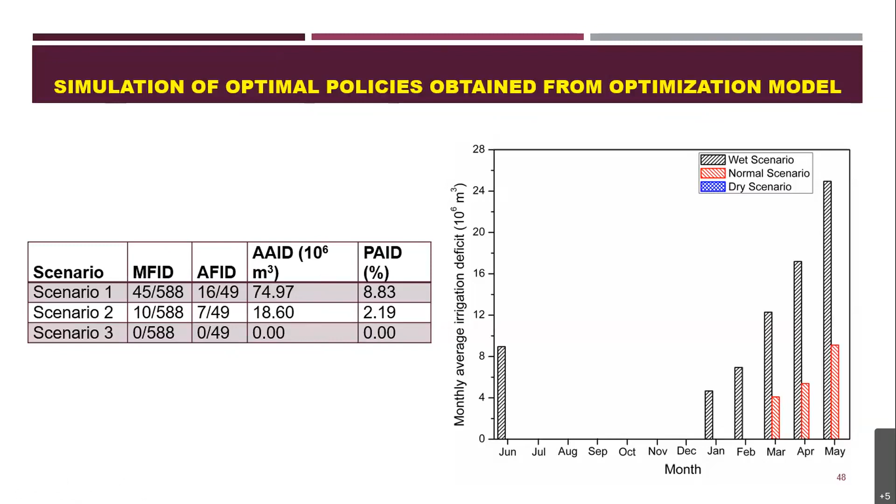So from this study, we concluded that among different dependable inflow conditions, the 50% dependable inflow level resulted in more power production due to high inflow. The model resulted in maximum power production of 5826.29 million kilowatt hour when there is no restriction in releases.

It is observed that the increase in release for irrigation has decreased the power production considerably. This study shows that the power that can be produced with all the release constraints is only 55% of the power production potential of Koyna reservoir. The developed model has also resulted in good storage at the end of the season, and the available storage can be further utilized for more hydropower generation.

So with this, I conclude my presentation.

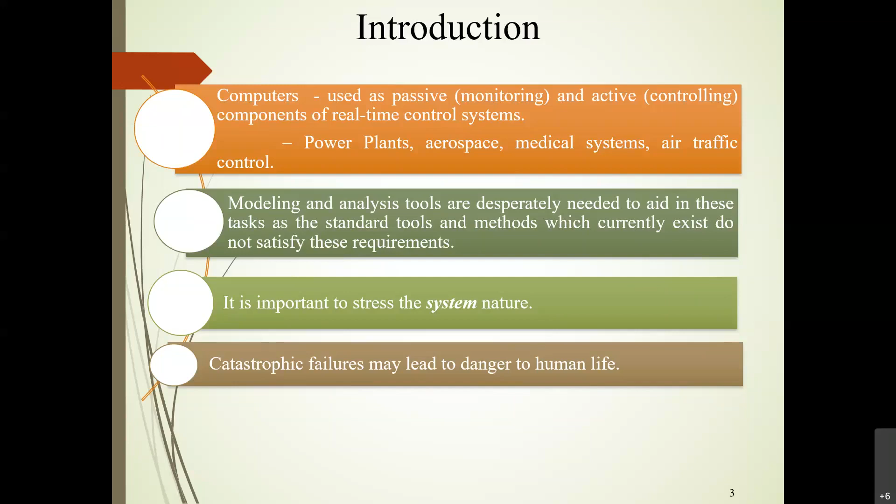One interesting fact we can emphasize is that software does not harm anyone. But software has the power to control the hardware through some electronic relays, and hence only the hardware can damage things. So the software safety must also be considered as a part of the overall safety, because ultimately all the hardware is basically being driven by the software.

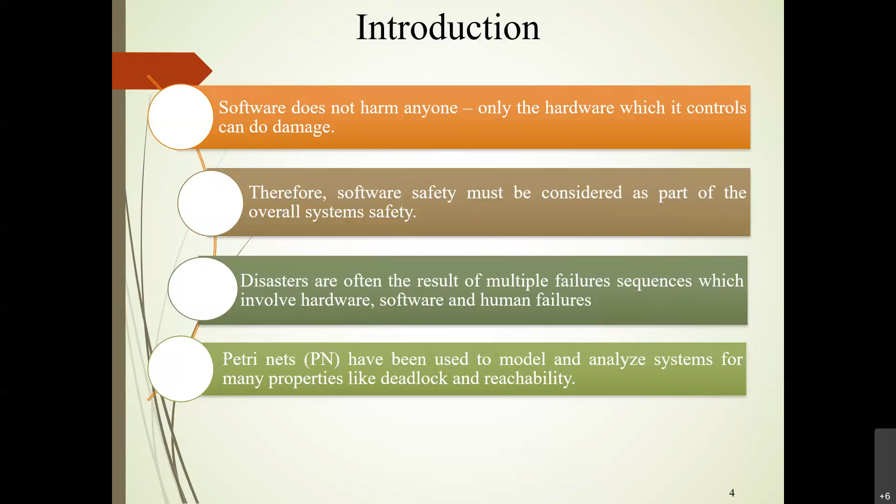Now coming to the Petri nets, as I talked, this is a mathematical and graphical model, and the concept was introduced by C.A. Petri. And why a graphical model or graphical tool? Because it has a modeling capability to represent the behavior of the system, or to represent the dynamics of the system. And basically, this will help all the stakeholders in their respective domains.

For example, if I'm a businessman, I want to outsource a project, and I write the specifications. But we know error gets introduced from the requirement specification itself if there is some ambiguity in the requirements, or the client is not able to understand the requirements properly, and is implementing something else. So if I outsource a project to any organization, they can model the system using this Petri nets, and model the runtime behavior also, which can be shown to me, and I can find out at that time whether all the functional requirements have been taken care of. And in case something is missing, I can point it out, and the things can be rectified there itself.

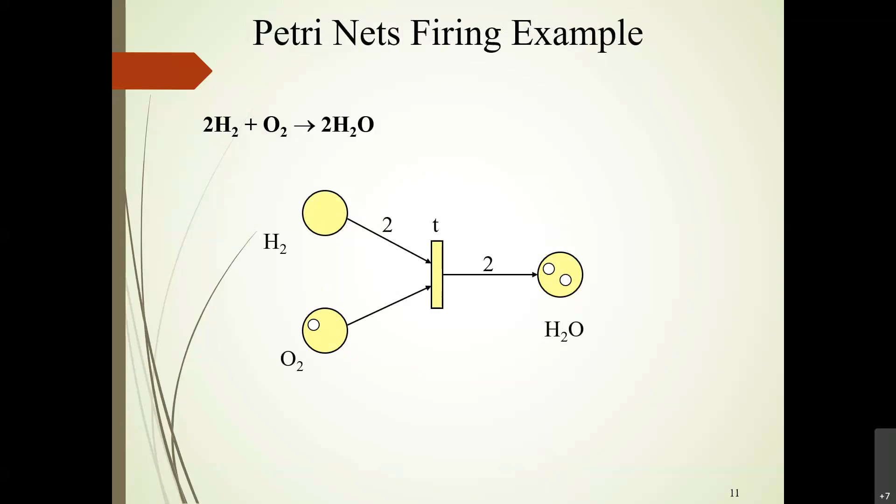Now let us talk about the case study. I'm taking a case study of a reactor protection system. A reactor protection system is a complex control system which contains several safety electronics components, mechanical components, software components, known as nuclear safety components. This protection system is used when I want to shut down the nuclear reactor under some emergency conditions.

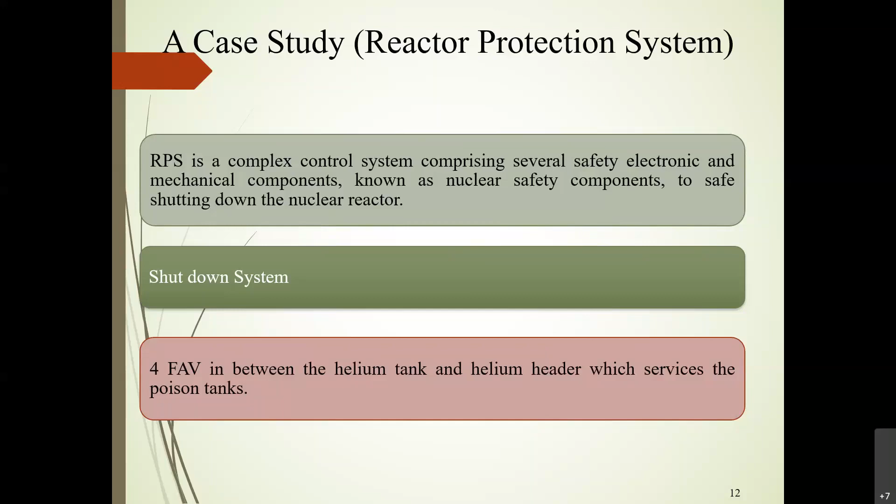And in the calandria the nuclear fission reaction takes place. We all know the working mechanism of the nuclear reactor. So what happens is the heavy nuclei, or the elements having heavy nuclei, are used as fuel. For example, uranium, plutonium, thorium.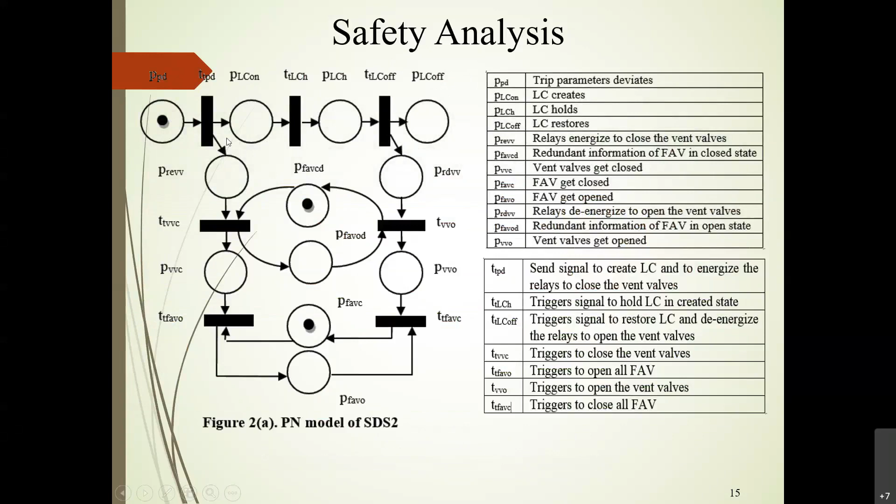Then let us go back and see. This transition TTPD is fired, and the token will move out from PPD to PLC on and PRE, and the rest of the distribution will remain the same. So what I have done is replace PPD, and after firing the TTPD transition, the token distribution has now moved from PPD to these two places, PLC on and PREVV, and the rest of the places are the same. Similarly, we can keep building the reachability graph till we identify all the states, and this is the reachability graph.

So basically, it is showing all the possible number of states, and now we have to analyze the risky states. If you are able to see in this figure, S3 and S6 are the risky states which are marked by a solid triangle on the left upper portion. And why this is a risky state, let us try to analyze.

We can see in S3 it is written PLCH, meaning logic condition is on hold. And then PREVV and PFAVCD, meaning my fast acting valve or the quick opening valve is closed. So this is a very risky state. I have created a logic condition, meaning there is a demand to shut down the reactor, and also my quick opening valves are in closed state. So this is a risky state, and hence I don't want this state to be confronted.

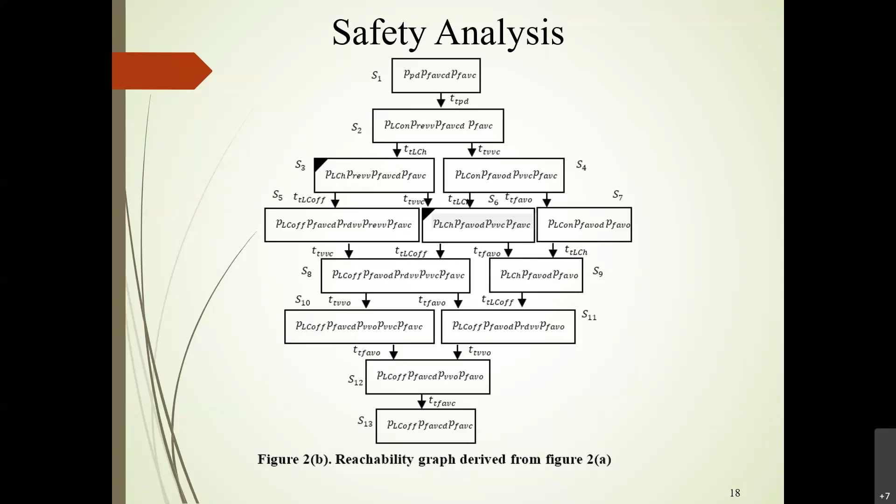And how then it needs to be done in the modeling. First we'll have to do the modeling, and then we will come to the implementation part. So coming to the model, it is very simple: just introduce two additional places.

And I want to always put TLCH on the lower priority. So the transition which I want to put on the higher priority, just connect from that to the lower priority transition by putting a place in between, so that every time TVVC fires, the token will come into that additional place, which is the input place of the lower priority transition. So it will not fire. Whenever these two transitions are in firing state, only TVVC will be given the higher priority.

Similarly, I want to prioritize TFAVO over TLCH. So again, I have to put one additional place, I2 — sorry, I think I1 and I2, these labels are missing, I think. The same thing will be valid here also.

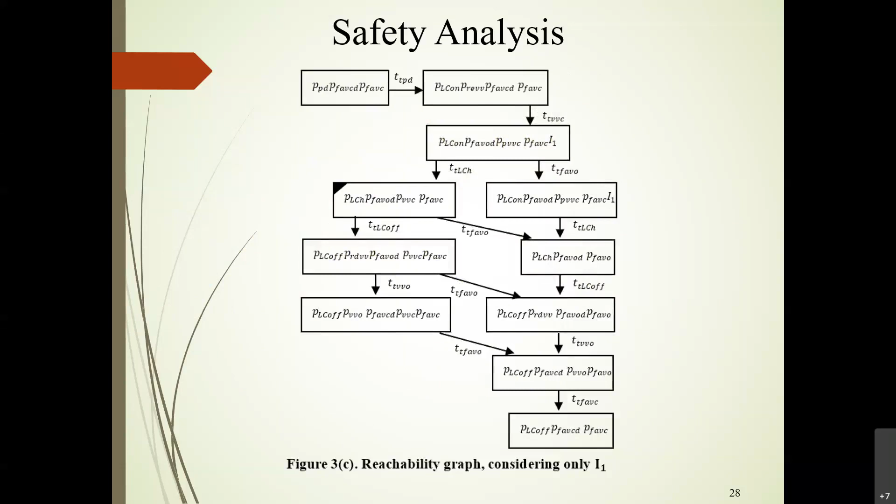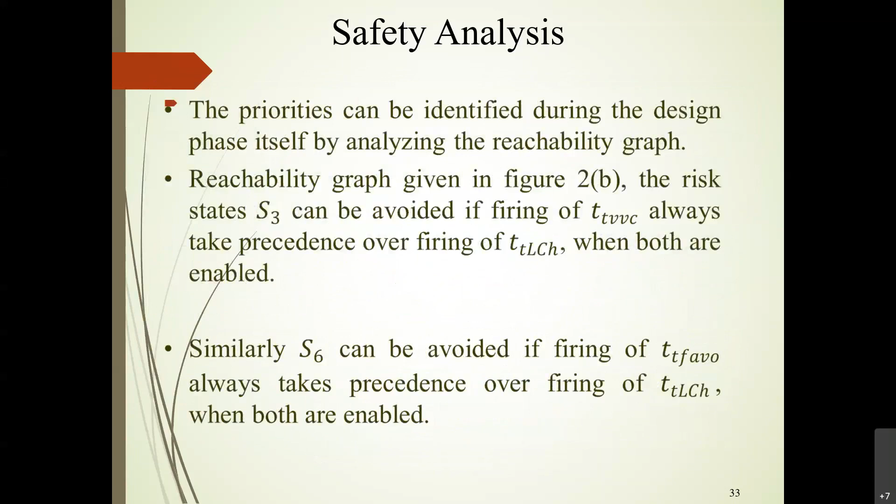Now let us come to the implementation part, how it should be implemented. We know that real-time operating systems provide a feature to the application software which can help prioritize the tasks. So the other way to impose precedence among the parallel transitions to avoid the risk state, we can enforce the firing of transitions as per the defined priority.

So how can it be done? It can be done by enforcing timing constraints in the design. In our study, we have to keep this constraint: minimum TLCH should always be greater than maximum of TFAVO. This ensures that TFAVO will always be given the highest priority, because the time delay is always less for this.

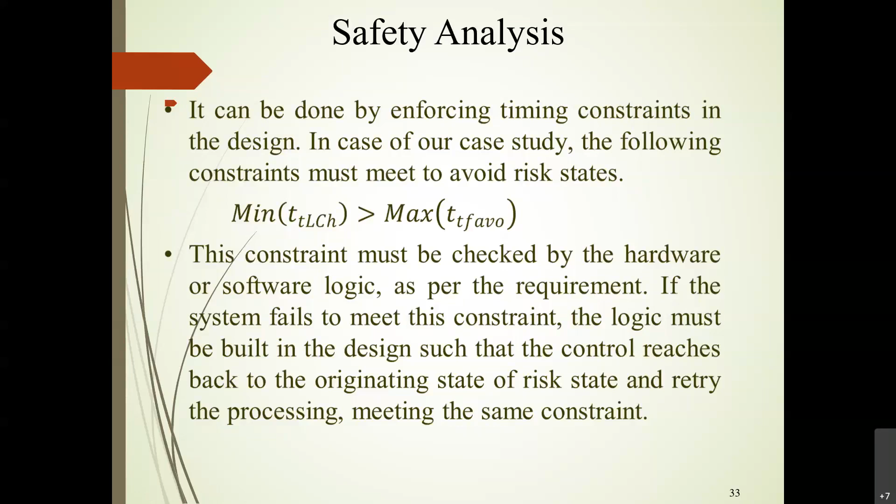This constraint must be checked by hardware or software logic as per the requirements. If the system fails to meet this constraint, logic must be built into the design so that control reaches back to the originating state of the risk state, so it can retry the processing meeting the same previous constraint and states. This logic can be achieved by the soft watchdog or the hard watchdog.

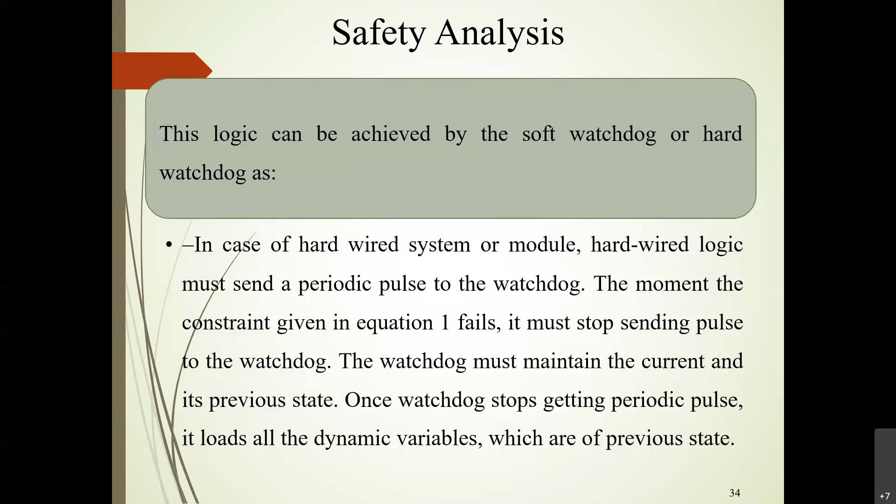In case of the hard watchdog module, hardware logic must send a periodic pulse to the watchdog. The moment the constraint given in that equation fails, it must stop sending pulse to the watchdog, and the watchdog must maintain its current and previous state. Once the watchdog stops getting periodic pulses, it loads all the dynamic variables of previous states. The other possibility is to reset the microprocessor IC through the reset pin, which will reset the system state.

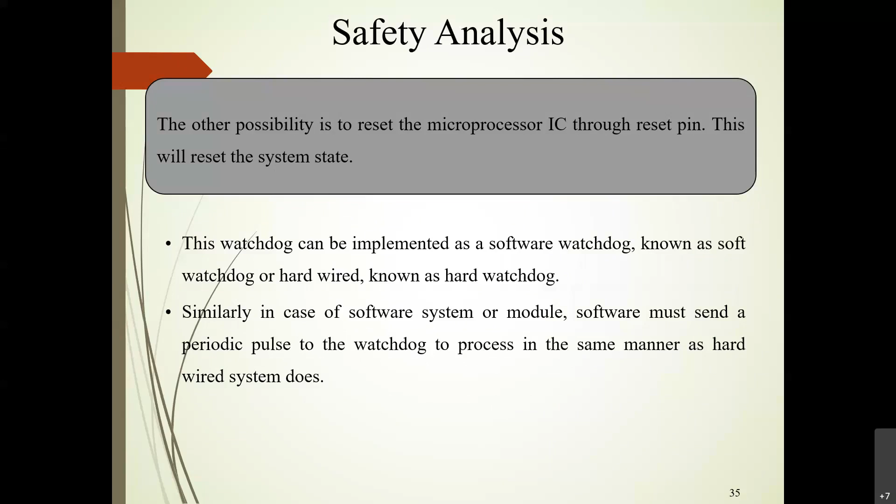This watchdog can be implemented as software, known as soft watchdog, or hardwired, known as hard watchdog. In case of software, the software has to send the periodic pulse to the watchdog to process in the same manner as hardware does.

Now we have touched upon the implementation part, but once we deal with engineering, we always strive for the optimum solution, and hence we'll have to look at possible worst case scenarios to make my system robust.

For example, in our case, I have created a logic condition to trip the reactor, and the embedded system closes the vent valves, but there is some bad signal that overrides this closing logic of the quick opening valves when the reactor shutdown was in demand. This can be identified by the inconsistent information in PFAVO and its redundant place, and PFAVC and its redundant place. So it could be a real condition or it could be a fault, but logic must be built into the design that in either case, the system will always treat the quick acting valve or fast acting valve in the closed state and resend the signal to open it immediately.

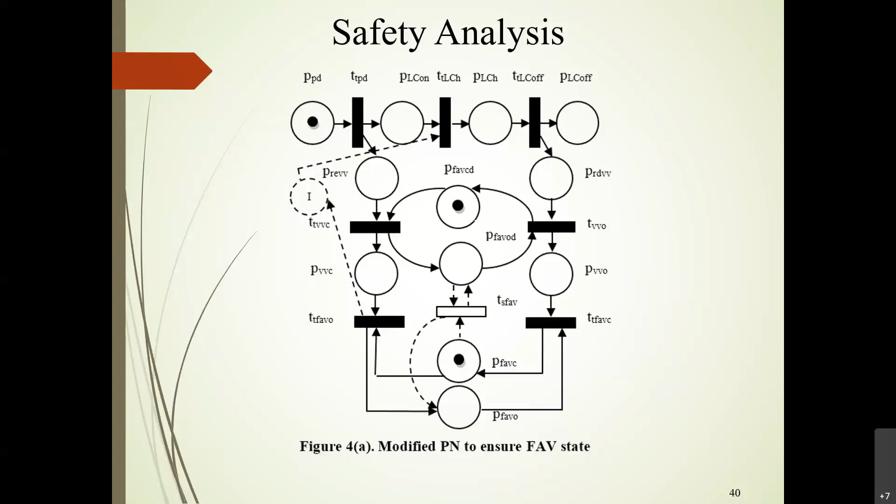This can be implemented by introducing a new safe transition, tsfav. It is a safe transition, FAV, so that whenever such condition occurs or not, it will always see if the trip parameter is there, and it will pull out the token from the fast acting valve closed state and intentionally put it into the fast acting valve open state, so that it can ensure the quick opening valves will be opened in case of emergency.

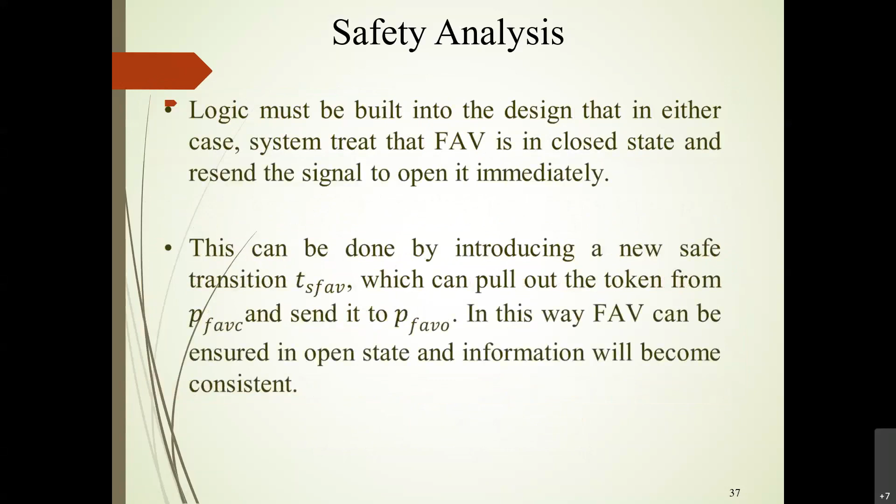And now, again, we can see the firing that if there is some conflict into the states, we can prioritize the states in a similar fashion. This design can again be validated by drawing the reachability graph, which we can see. Now all the states are risk-free states.

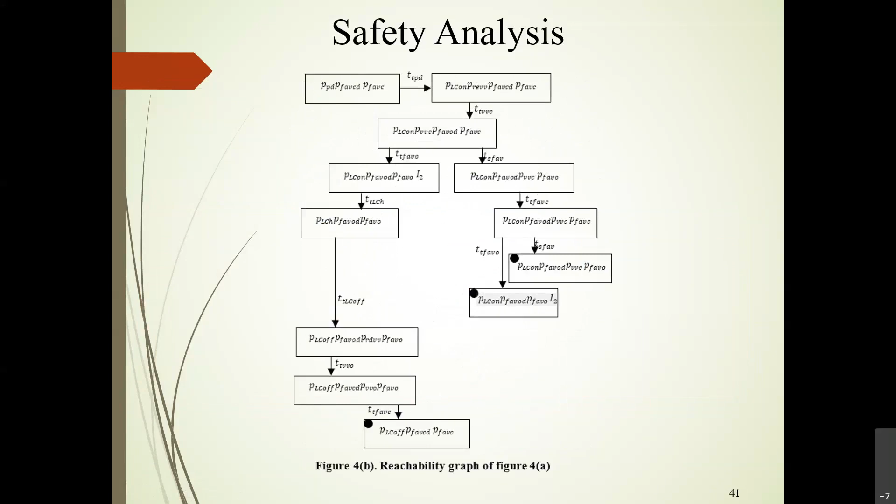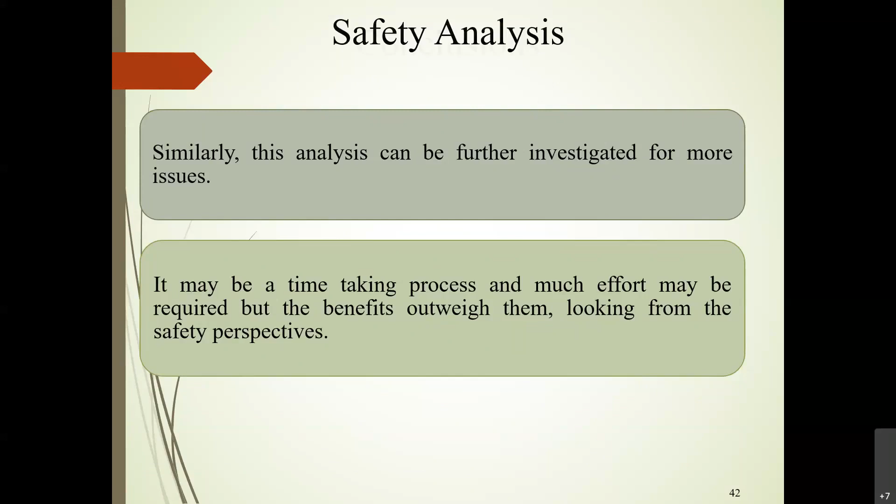And in this way, more and more we can investigate the process with respect to the domain knowledge. So it may be a time-taking process, much effort may be required, but the benefits outweigh them, looking from the safety perspective.

So in conclusion, we can see the safety analysis can be decomposed into various segments. Suppose, for example, you are dealing with a large system, or your system is very complex, then you should understand, with the help of the system analyst, you should identify the criticality of the various functions, and you have to put them into the hierarchy, because you should know all the risks do not have equal probabilities.

So the functions which are more responsible to perform the most critical functionalities of the system, just identify those functions, and you give the priority or more rigorous analysis to such kind of systems. And you have to develop the modules also in the hierarchical fashion, so that the critical functionality you keep in one module and the non-critical in the other module.

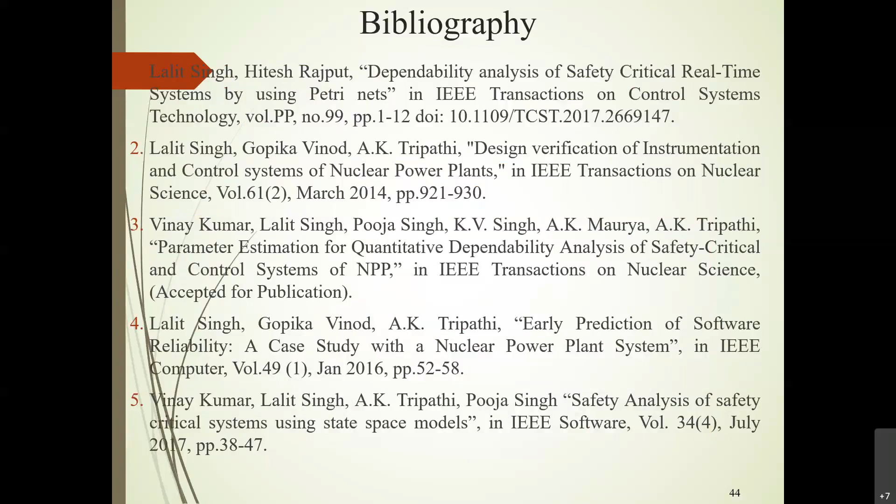These are some of the bibliographies you can use. And in case of any questions, I'll be happy to answer those questions.